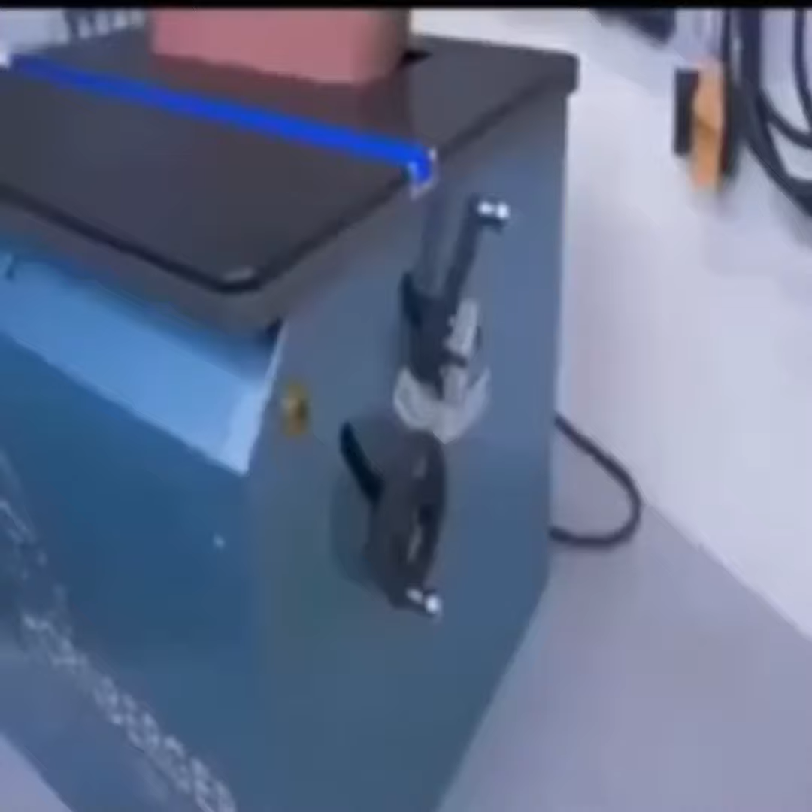Changing belts is done easily by flipping a lever, and the whole belt attachment comes off with this lever. Sweet! One feature I decided against is a tilting table. That's just inconvenient. On my machine, the belt tilts. Much more useful. It's effortless with this lever and clamped with a single knob. There's nothing on the other side, everything done from here, but it gets clamped on both sides. I'll show you later how that works.

And the big dust collection part is out of the way in the back. That's everything from the outside. You will never believe how I made the oscillation mechanism inside. But first, let me tell you the stupid reason why I built this machine. Not because of the mechanism. A few years ago, I bought this sander with way too many sanding belts now sitting in storage. And I just wanted a better use for them. Really stupid, but that's the truth.

Now, how do you approach such a project from scratch? Where to start? Well, I'll try to summarize. I wrote down a list of requirements with features I wanted the machine to have, like the tilting belt, the height preset, and so on. Then when designing at the computer, I put each feature into its own assembly. So this does the oscillation, this does the tilting, you get the idea. And wherever possible, I try to integrate multiple features into a single assembly. Sounds straightforward, but all that was the hardest part. I spent a lot of time designing. But then you can build assembly after assembly and bring them together.

So let's get back in time when this didn't exist and begin with the oscillation mechanism. I've got this precision ground shaft which needs to move up and down together with the sanding drum. A common solution is a geared motor with a crank, but to me, that's kind of boring. I wanted to couple the mechanism mechanically to the spinning shaft with a gear reduction. That should be interesting. From my machine specs, I need a gear reduction of 25:1, and I could do that with a worm gear drive.

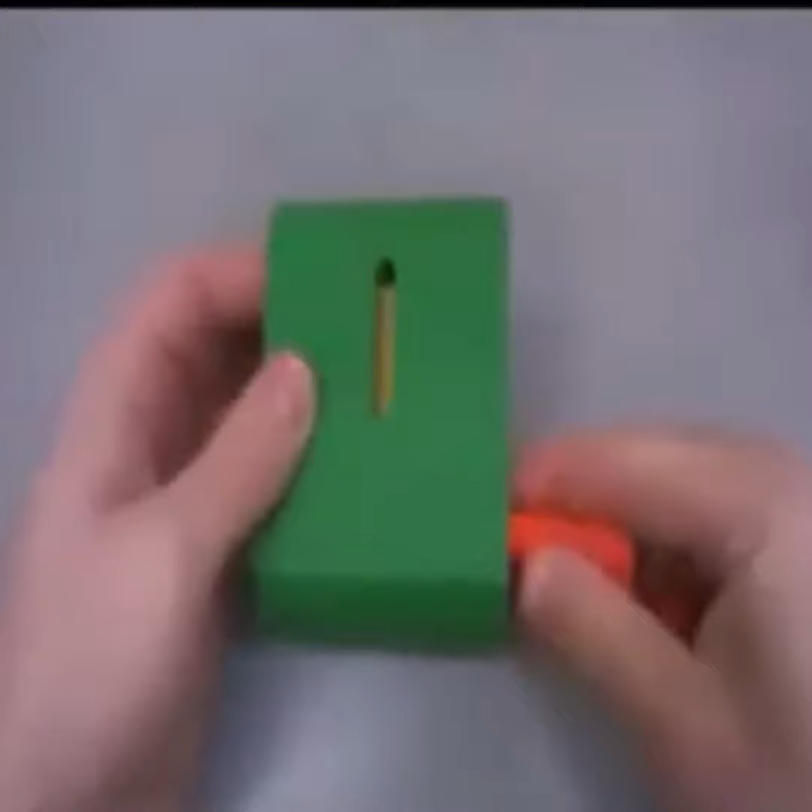Every turn, the worm advances the gear by 1 tooth. It has 25 teeth, and I've got the right gear reduction. And then I can slide this into this housing, add a crank pin here, and there's the complete oscillation concept. It's a great concept with few parts, but 3D printed like this, it can't survive long term. This has to be metal and constantly lubricated, so I would need to find just the right one off the shelf or have it custom manufactured. That's not gonna happen. So another mechanism with a high gear reduction is a cycloidal drive.

And if you ask yourself what that is, take a look at my logo. That's a cycloidal drive. Conceptually, it's simple. We have a housing with pins, the shaft with an eccentric cam, the cycloidal disc, and an output ring. The shaft goes in the housing with the cycloidal disc on top, and when I spin it, it does this kind of motion. The output ring fits on top and turns that wobbly motion again into a smooth rotation. The gear reduction is the amount of teeth of the cycloidal disc, so in this case 9:1. This concept I'm sure I can make reliably lasting with simple off-the-shelf parts and 3D prints.

And so now we've got a fast spinning shaft and a slow spinning gearbox, but no oscillation yet. On this concept, the output gear is oriented 90 degrees to the main shaft, making the crank possible. And I still need that for this one. Bevel gears, for example, could do that. But again, I don't see them lasting a long time. So what else could create oscillating motion?

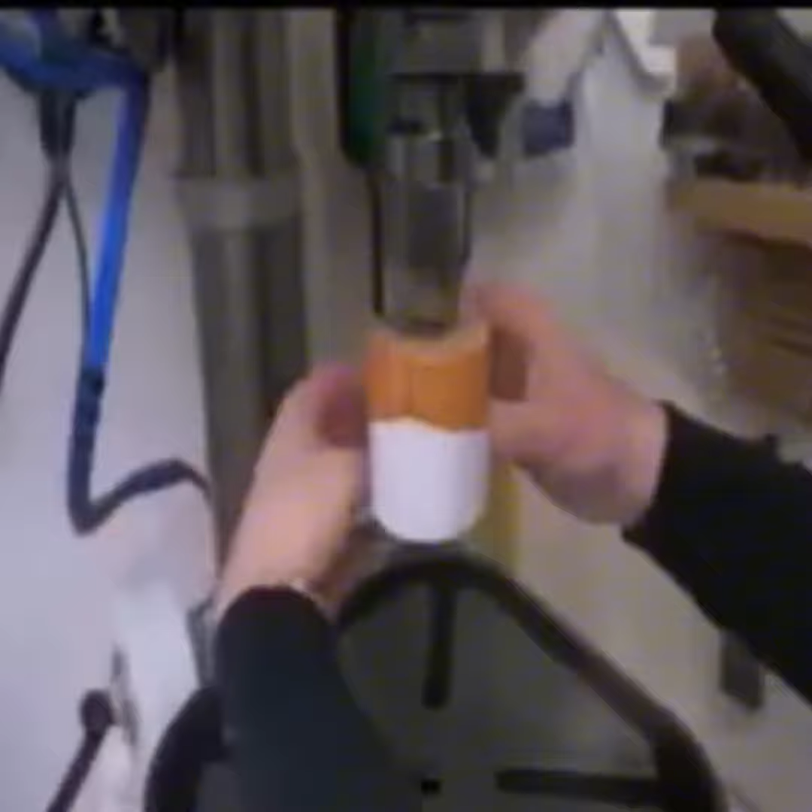Let's start simple with this ramp shape. If I move this back and forth, you can see the intersection here is moving up and down. And I could pick that up with a bearing. Now let's mirror that ramp, and the result is one up and down motion without changing directions, or rather, one full oscillation. But how is this helpful? Well, when I wrap it around a cylinder and make it spin, I now get continuous oscillation.

And what actually matters, this cylinder is the same orientation as my gearbox output and a single part. No need for bevel gears. So I think we have quite an elegant solution here and can get serious making the real version.

Getting serious means a lot of 3D CAD work. I modeled the entire assembly with every component before I ordered parts or started printing. But here we go. There are many printed parts, a few bearings, pins and screws, and machine parts, which I need right now, so I cut off pieces from some tubing. The longer bushing goes on first, with a washer and screw as an end stop that I have to play with, of course. Let's put that aside for now.

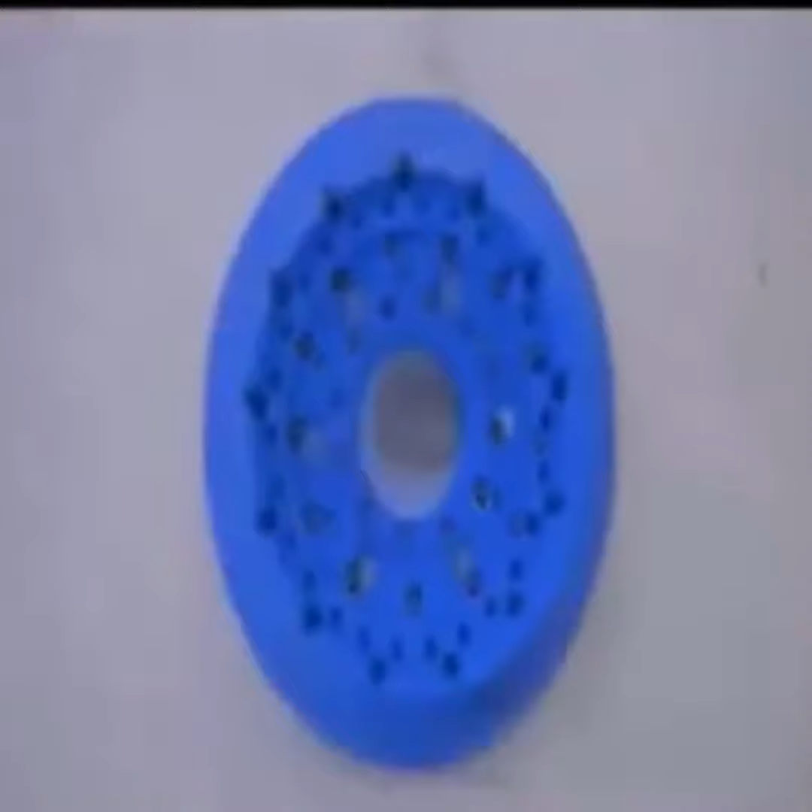Now the gearbox housing. The pins this uses are actual steel pins that fit in these holes that I still need to ream. The automatic compressed air comes in real handy here, removing the chips. The underside then gets a bunch of nuts pressed in, as well as a few on the inside. I could have also used the CNC Kitchen melt-in threaded inserts, but what they don't have is a plastic lock ring, and since I'm expecting vibrations, I wanted that.

This bearing is a light press fit in the center, and this ring goes on top, clamping it down, making this my fixed bearing. The large bearing fits around the housing, where it first slips down easily, and the last little bit is again a light press fit. And then insert all the pins.

Next, I need to make sure the cycloidal disc is sized correctly and moves freely in the housing. So when I put it in place, it should just drop down. But it doesn't, and I have to press it down. It does move, but it's pretty tough. I kind of expected this here because I designed and printed this with no air gap, and when that's a real mechanical part, it's basically guaranteed to bind in some way. I need some amount of air gap in here, but just don't know how much exactly, so let's find out.

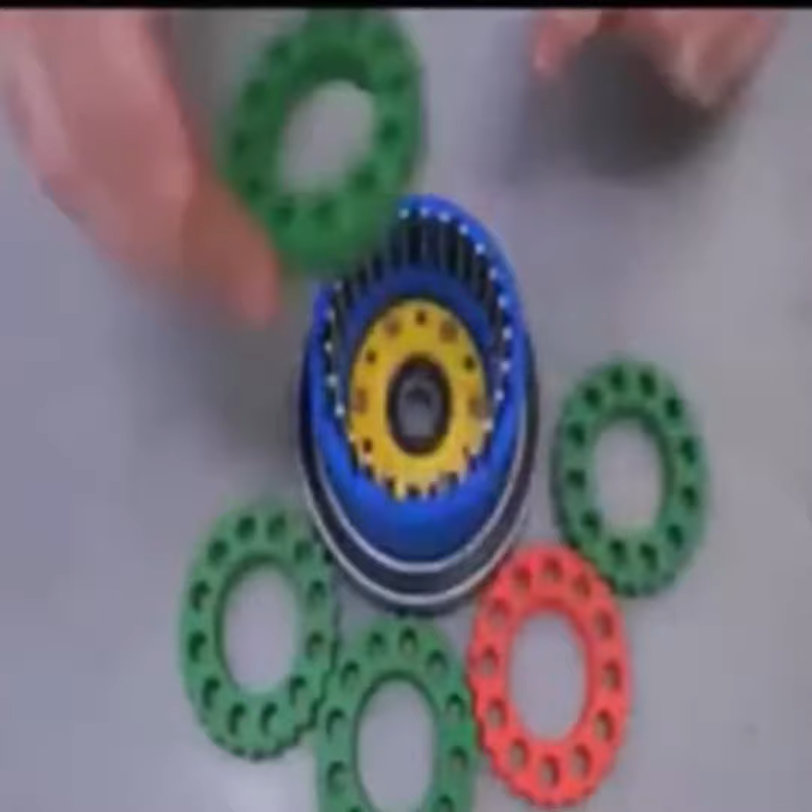I printed 5 discs with increasing play for testing, starting with 0.05. And it already drops down, but the movement is still kind of rough. 0.1. Yeah, that's a bit better, but there's still some places where it feels like it's binding. 0.15. Yeah, now it's getting better. 0.2. Yeah, that's great. And 0.3 is probably no improvement, just more play. Here you can see the play. This is 0.05 and this is 0.3. 0.2 seemed to be the sweet spot.

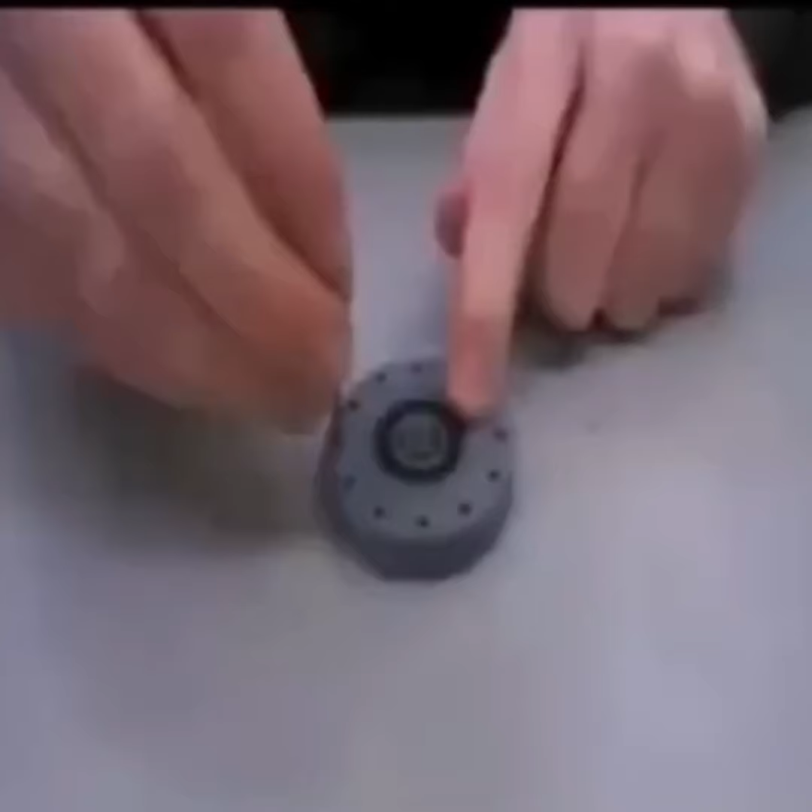Let's go with that. A bearing gets pressed in, followed by steel bushings in all the holes, which came in an interesting packaging. And then a second one. But before the discs came another ring first. It has some holes to ream, nuts to press in, a center bearing, and then the output pins, because this is part of the gearbox output and it sits below the cycloidal discs.

Now the parts can come together on the shaft. First the housing, then one of the spacers, and the output ring. Next come the eccentric bushings that create the wobbly motion. Their center hole needs to be reamed as well. Then I have a feature in them which positions them opposite to each other like so. To fasten them on the shaft, there's a pocket for a little square nut and a tiny set screw.

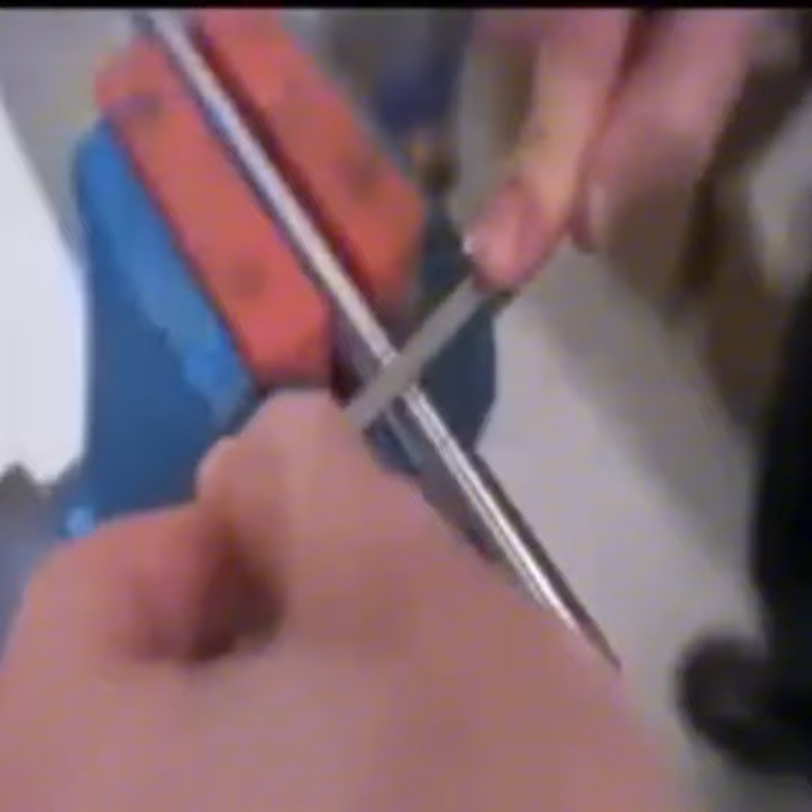And now the disc. Wait. Oh crap. I forgot to file flats on the shaft. And this assembly is not as straightforward. Yeah, at least I didn't forget to mark where to put the flats now. Since the steel is hardened, I'm using a diamond file and it bites into the material well. But there has to be a more accurate way of doing this.

I put 2 square blocks at the ends and this piece which holds the file parallel and at the right height. No need worrying about steady hands. But the real benefit is the second side, because I just need to flip the shaft and the second flat will be at a perfect 180 degrees to the first. Simple technique, but great results. The other flats are for later. Now I'm much more confident in the set screw and the cycloidal disc can go on top. I was really keen on testing, so let's do it.

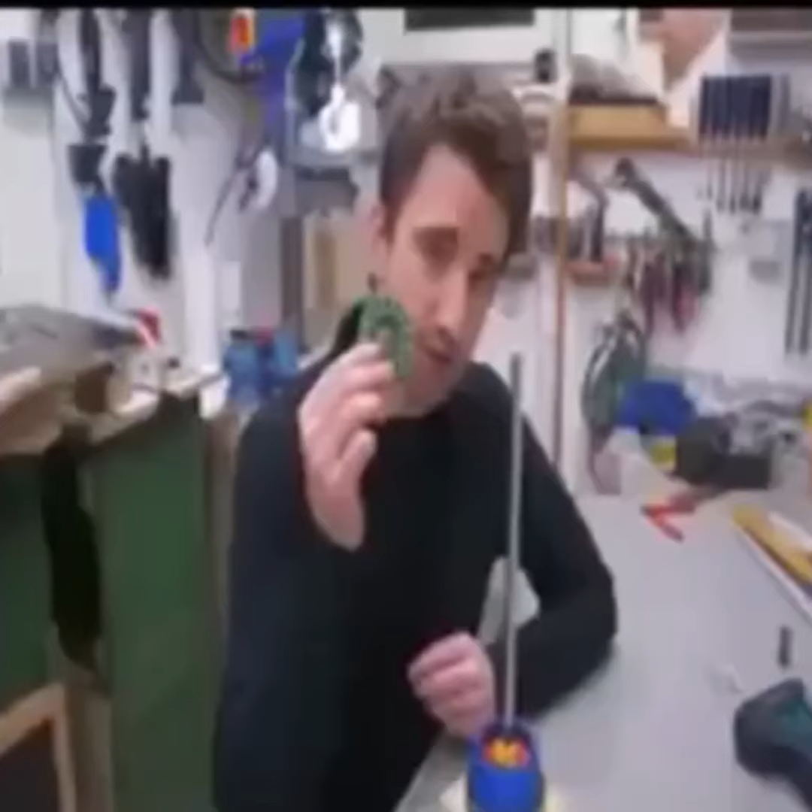This looks nice. So now the second disc. I need 2 discs because having only one wobbling around would vibrate. So having a second one opposite to the first one, the vibrations will cancel each other out. But I have to make sure the second disc is oriented correctly to the first one in the housing, otherwise these output holes won't line up with each other. Since I have 12 output holes and 25 teeth, this is not symmetrical and there's only one correct position. So I put a little notch at one of the holes to make this simple.

Right here. Looking straight down, you can now see how the holes of both discs kind of do a circular motion around where the output pins will be. So let's put them in. That looks promising. The remaining 3 holes are for screws. And after reaming the pinholes in the lid, it goes on.

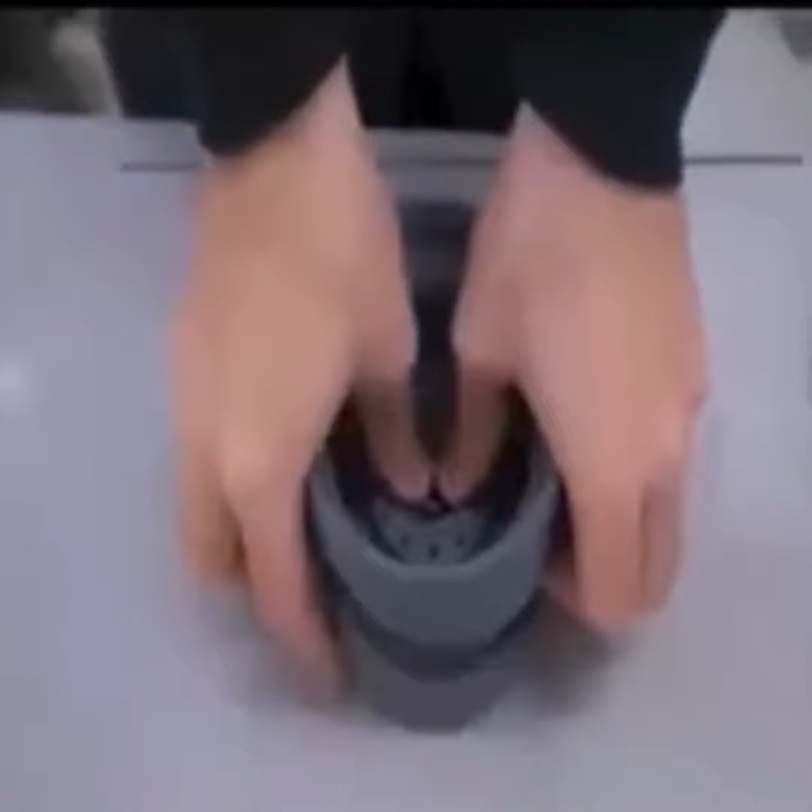On top now goes the actual gearbox output with matching holes, and on the outside there is the integrated ramp, which I made a lot smoother, and it also fits a bearing. As usual by now, reaming the holes and pressing in a bearing, then the last spacer washer, and then assembling all the parts together. The screws hold everything together, but I have to tighten them by feeling, and this is my by feeling face. Without context, this looks really stupid.

And finally, a dust cover with an improvised labyrinth seal. Oh yeah, that's the gearbox done. What a nice little compact unit, basically fully enclosed and protected from dust, which is nice. It's super smooth. I can't really feel resistance other than the 6 fresh bearings. And what you might not expect is this is back drivable, which means it works when I spin it here or here.

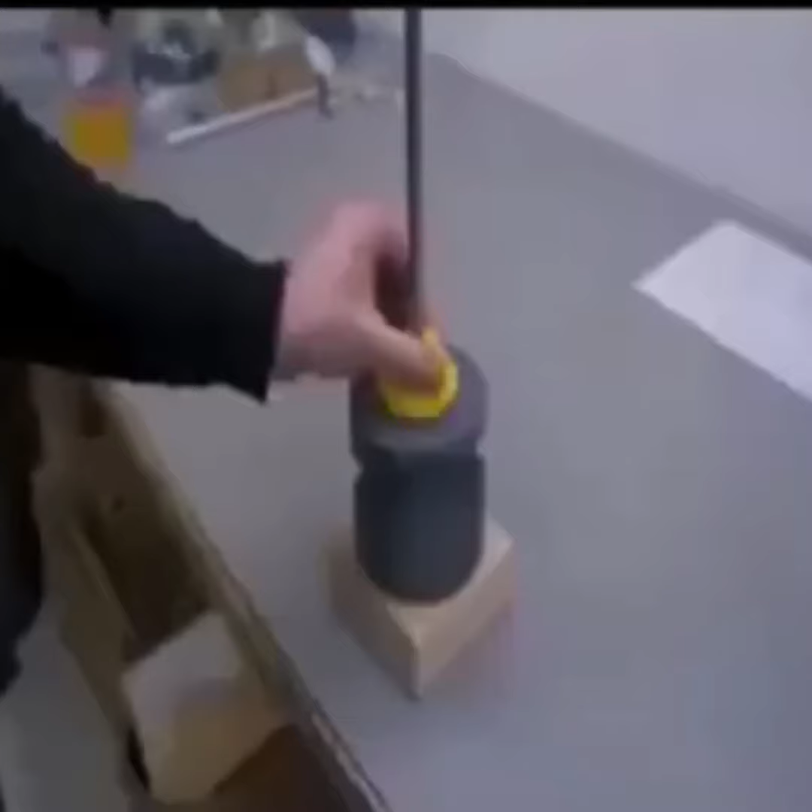That's cool. Just too bad you can't really see the inside now working. Let's fix that. There you go, I cut it open. Let's see it in action. So for this short sequence, I had to disassemble everything again, but this then at least allowed me to add grease when reassembling. But still, can this survive long term? Because it will run a lot.

Well, I'm confident because all the motion is either done by bearings, metal on metal, or at least well lubricated plastic on metal contact. And even if that's still not enough, I've got one more trick up my sleeve.

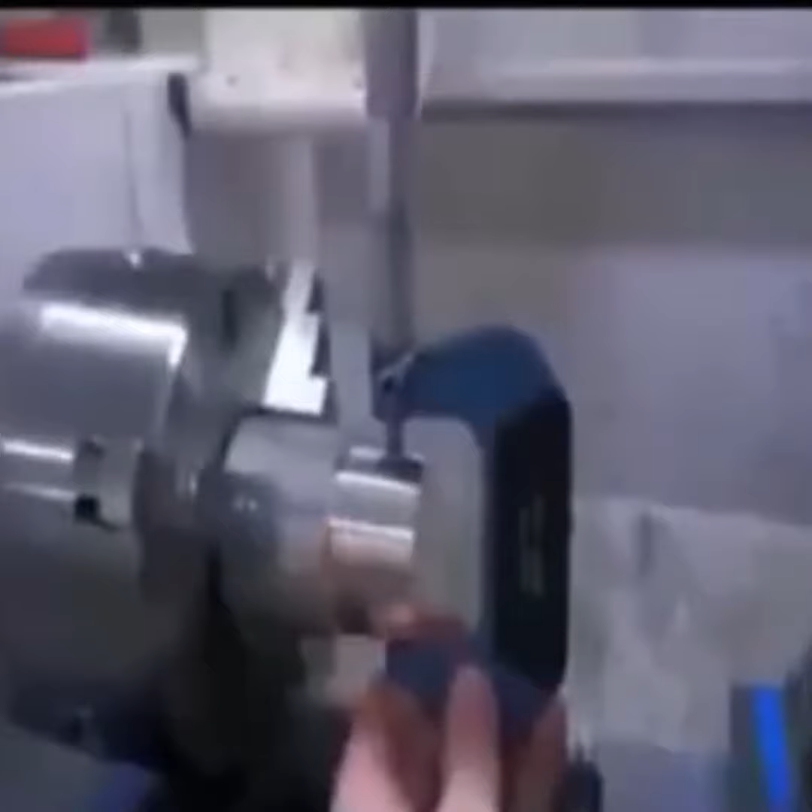But for now, let's disassemble it again, because until the final assembly, I want to stick with my parts, because I of course want to see if they work. The next part that goes on the shaft is the pulley. It's made from the pulley and the pulley support and starts out as this chunk of aluminum. This first gets a facing cut and then turned to size with a few roughing and finishing passes and a chamfer. It's a non-critical dimension, but still nice when you hit the 45mm exactly.

I used a 3D printed template for transferring the hole locations and then cut the piece off, but forgot to record. It could have looked like this. Except the diameter is too large for my tools, so the last bit is for the hacksaw. A quick jaw swap to clean up the second face, and then heading to the drill press for the threaded holes. Spot drilling, drilling, chamfering, and threading. Standard procedure.

For the set screw hole, I installed 2 screws that position the piece correctly in the vise, and with the ruler method, I made sure the part is centered. Then I carefully spot face with an end mill and do the rest. For now, this piece is done. The pulley starts as a scrap of polyethylene sheet, which I place on the CNC router to cut the screw holes and a slightly oversized circle.

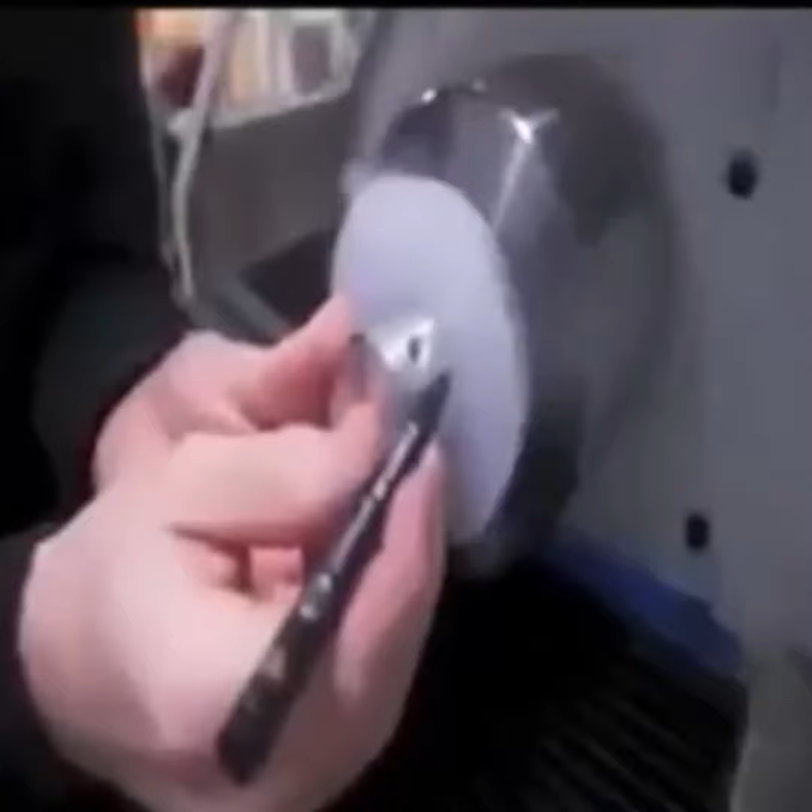Cut out, it goes in the chuck where I mark the rough size of a pocket, which I turn to a snug fit with the pulley support, followed by chamfers and removing this material, which creates very fluffy shavings. Then the pulley support goes back in the chuck where I faced it one more time and then screwed on the pulley with a dab of Loctite on the bolts.

I turned the diameter to size and sharpied it black to better see what comes next. Finding the edge with the tool, move it to the center, scratch the surface and zero the dial. Then plunging to a certain depth, creating the V-grooves for the belt and breaking the sharp edges.

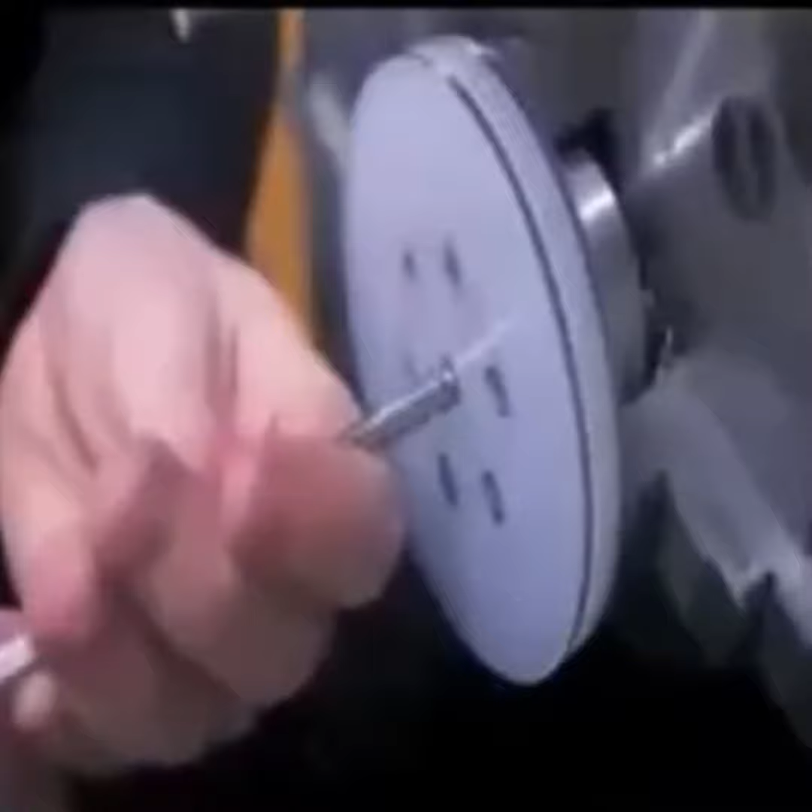The last feature is the precise center hole, which I drilled and then carefully turned to size. It took many passes, but I hit my target and the result is this. Perfect.

Alright, next comes the upper bearing block. The upper bearing sees more of the load when I'm pushing against the sanding drum, so I made the bearing housing from aluminum. Here I marked the side centers, which helped me to position the piece at the correct location on the machine bed. There, I first machined the holes that align with my hole grid, so I can use 2 bolts to hold it down, and then I let the machine go to work. The finishing pass is really satisfying, as well as the chamfer.

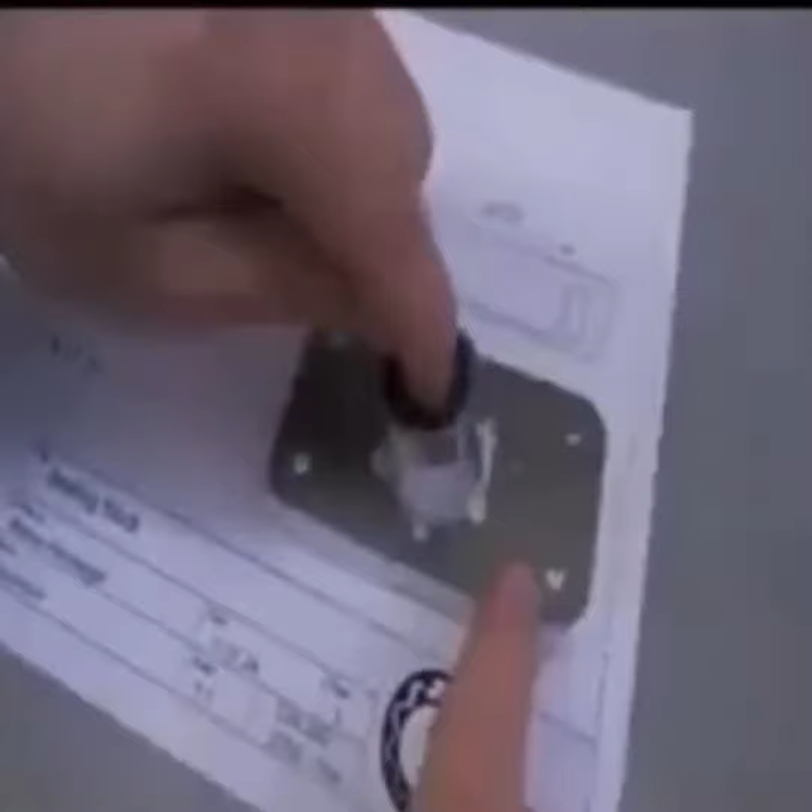Turned out really well, but right now the bearing doesn't fit, because the CNC is not accurate enough for a bearing seat. And I want to turn that, so somehow I need to hold it on the lathe. I've got some round offcuts from a laser, that should work. I marked the center and the hole spacing of the 2 hold-down holes, which I then quickly turned into threads. With a magnet on each jaw, the plate has just a little bit of stick out.

I face it by leaving some material at the center, and after about 1 mm, I turn it to a nice fit with the aluminum. That puts it in the perfect center and I can hold it again with bolts. I left myself about 1 mm of material so I can do multiple passes and get it accurate. And I think that paid off. The result is spot on. Then turning the hole to final depth.

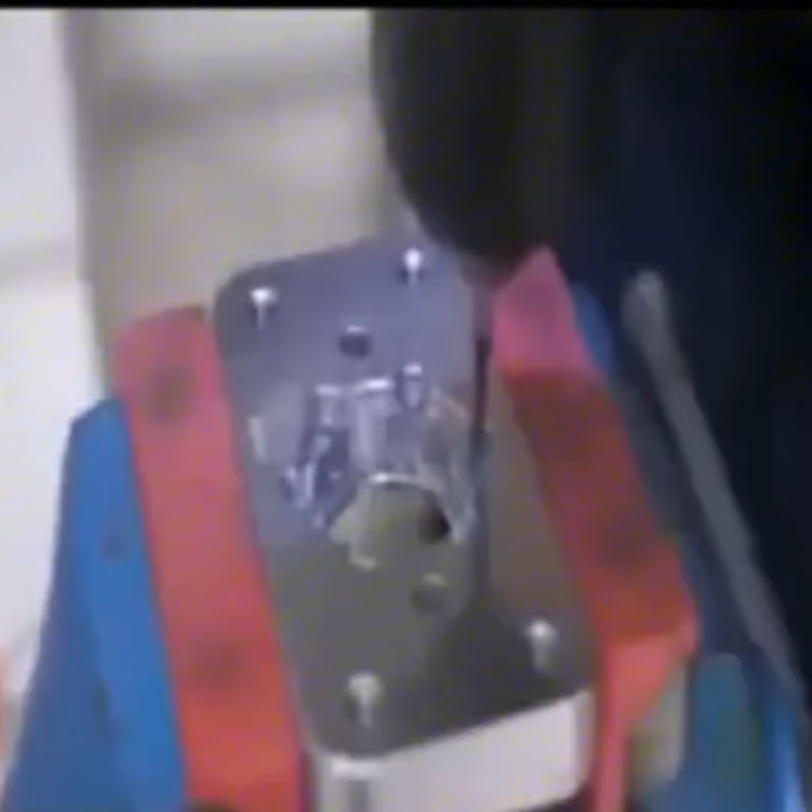At the drill press, I drilled and tapped the outer holes to M6 and the inner holes to M3. But since they are blind holes, I finished the threads with a drill and a low clutch setting. The bearing nose should be a light press fit. And it's not. Oh, fuck. Turns out the bearing is also slightly undersized, which I should have measured before.

But at least I can now try out a trick my dad told me. A layer of Sharpie. It's a few microns thick and should solve the problem. Oh yeah. That's a press fit now. Nice. And the 6 screws hold it in place.

The last part that goes on the shaft is the drive block thingy that engages with the sanding drums. It's straightforward and similar to the pulley support. I face and turn some stock to size so it again fits the template, chamfer it and cut it off. This time with recording it. Flipped around, I faced it to length and then drilled and turned the hole to the same fit as the pulley.

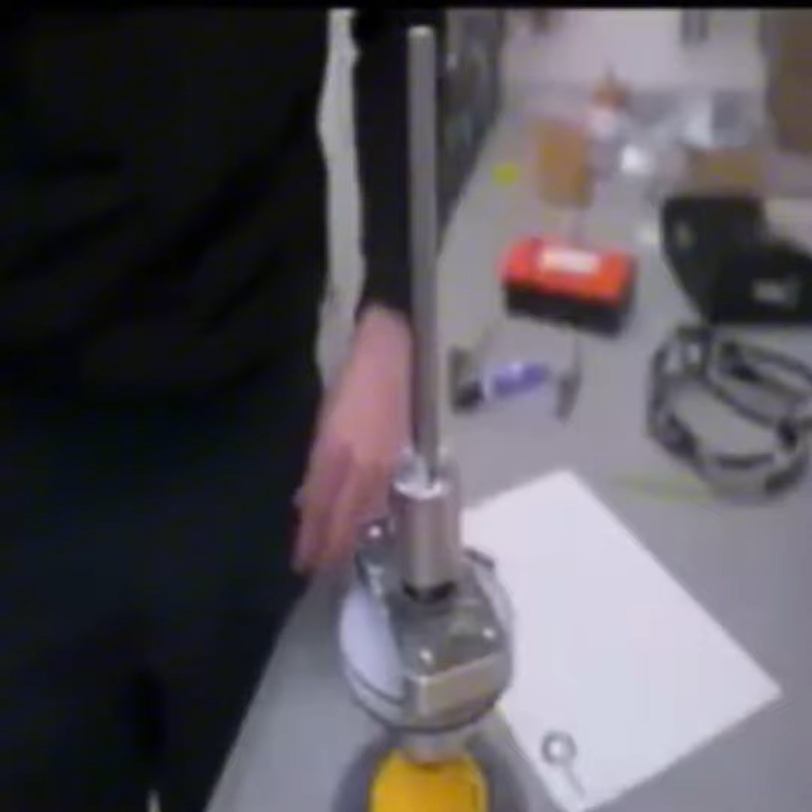Then transferring the hole positions, drill and ream them to size and depth, and hammer in some pins, which will engage with the sanding drums. They also align the part in the vise for the M6 set screw hole. Very nice. Everything is mounted, but it's far from being a finished sander.

This needs to be mounted in something, and I call that the sled. The sled basically is a wooden box where all parts have different features cut into them, and after a bunch of toolpath programming and flattening the CNC bed, I can begin. The workhorses are these single flute bits in different diameters. They allow me to take aggressive cuts and remove a lot of material. But first I have to prepare my material.

Some 18mm thick birch plywood, which I cut into roughly oversized pieces, and then cut a shallow groove all around for my hold-down clamps. This gives me access to the whole surface for machining. But mostly, the stock material isn't flat to begin with, so I shim the gaps to not bend apart with the clamps.

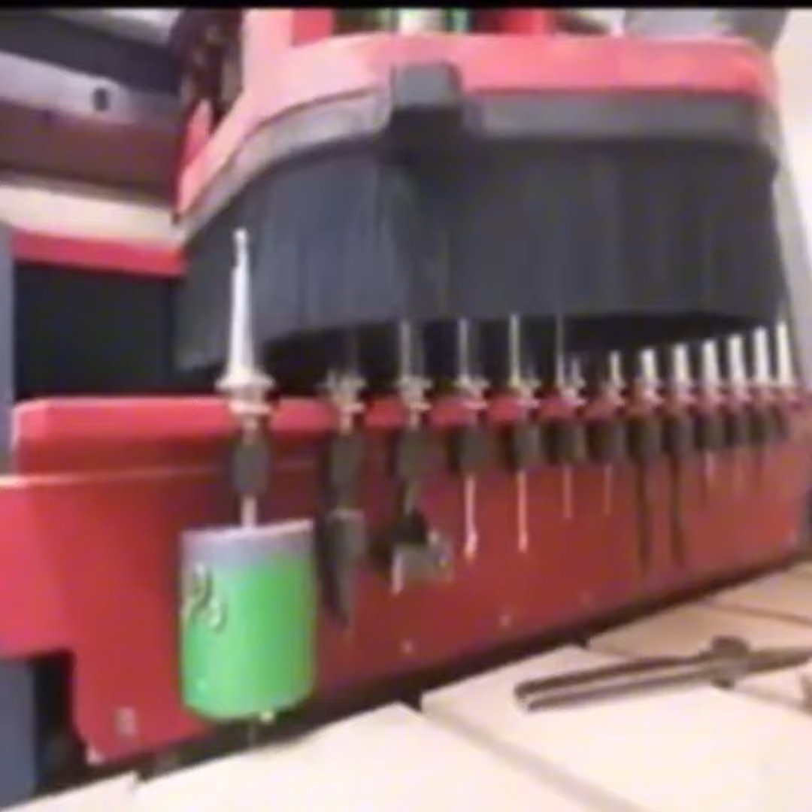I then cut the various holes and other features into the part, followed by the outer contour to about half the depth. Then I switch to the flattening bit to make the surface flat and also cut away all the burrs from previous operations. And then the program waits for me to switch to screws to finish the outer contour.

And like this, I cut all the parts. Some I also just tapped. And of course, I also had to crash into the shim, destroying this brand new bit. At least I can continue, so I removed all the bigger chunks, flush trimmed the edges, and made new grooves for the second side. I then used pins to precisely position the parts for the second side.

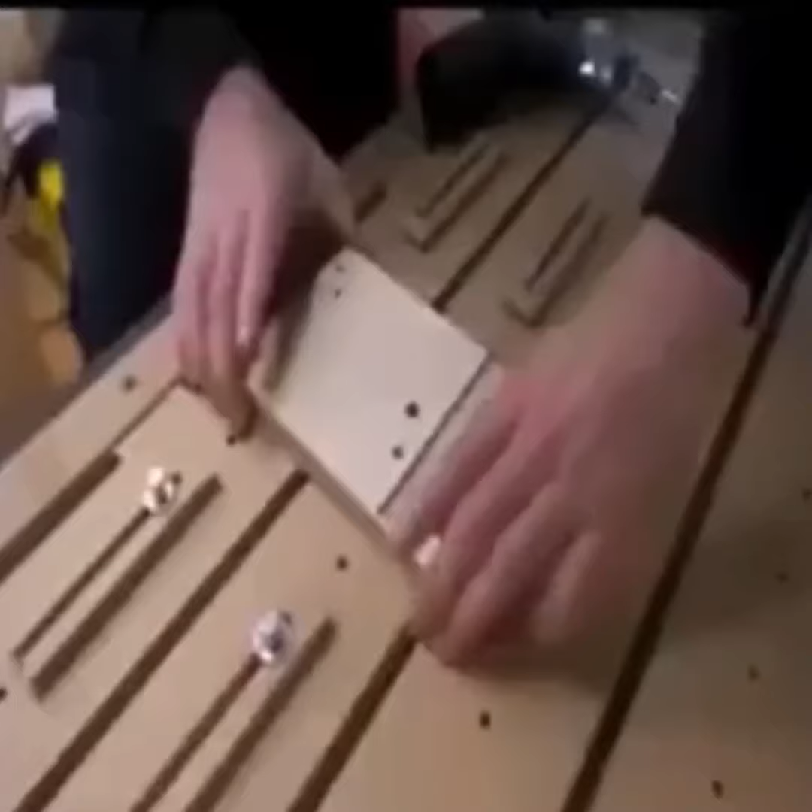That works because I have the same hole layout in Fusion 360, so the software position and the real position match, and I don't even have to probe the parts. Most of the second side operations are holes, chamfers and big chamfers, and flattening to thickness. Basically, the same for every part. And there are all of them finished.

And none of these parts are sanded, but by using the right techniques and especially order of operations, I get these clean and sharp edges everywhere on both sides. Let's check the fit. Ah, beautiful. Before assembly, I inserted a few nuts and some steel pieces that I first needed to make. However, straightforward. They will be used later.

I'll do the assembly here on the table saw, because I know this is a flat surface, starting with the back and middle piece. The bottom edge needs to be flush, and then I can transfer the holes. All these screw joints got a clearance hole using the existing holes as a guide, then a pilot hole, and then a screw. That way, the drill bit doesn't wander in the plywood edge.

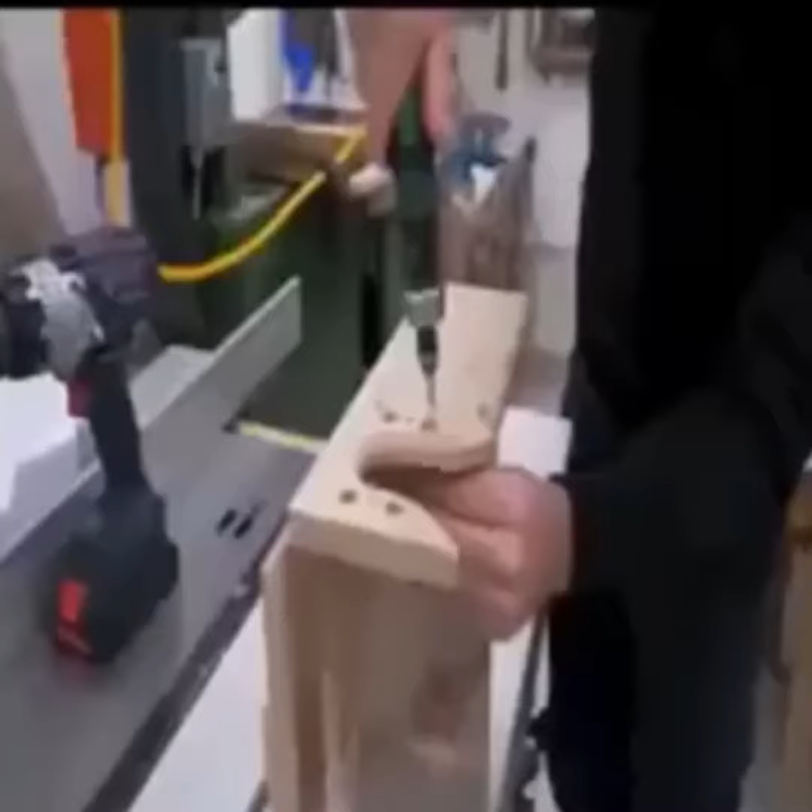Then the top plate flush with this edge, the left and right side. But they needed to be clamped in position. Lastly, this bottom piece, but it seems to be just a hair too wide. So that's the sled skeleton almost complete, and because of the way I designed this, all the pieces are kind of squaring up each other, making this a square block all around.

With it all together, I could remove a few screws again and replace them with the dowels to make it a more permanent connection. Next came two pieces for the motor mount, except they didn't require the CNC router, and then they got bolted on with the nuts I previously installed. Then I made these angled pieces that closed the gaps between the top and back plate and glued them in place.

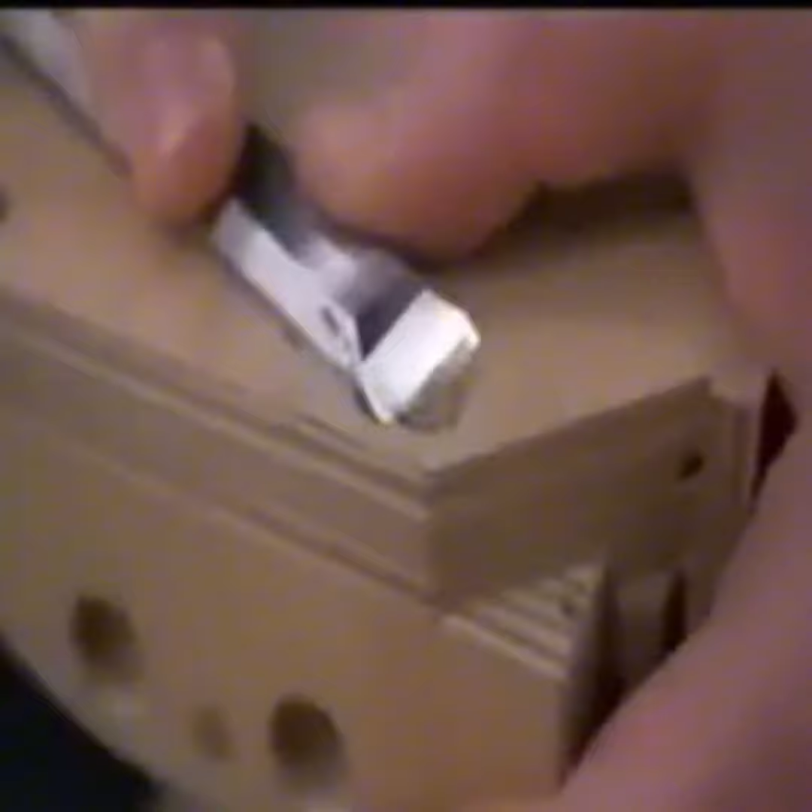With the glue dry, I flush trimmed all the dowels and then cut a large bevel, which is for clearance when tilting. That's the finished sled frame. Let's add components to it. The gearbox with belt goes in here, where the housing gets bolted to the bottom, the bearing block to the top, and the motor goes here. Yeah, what motor? I've prepared something for that.

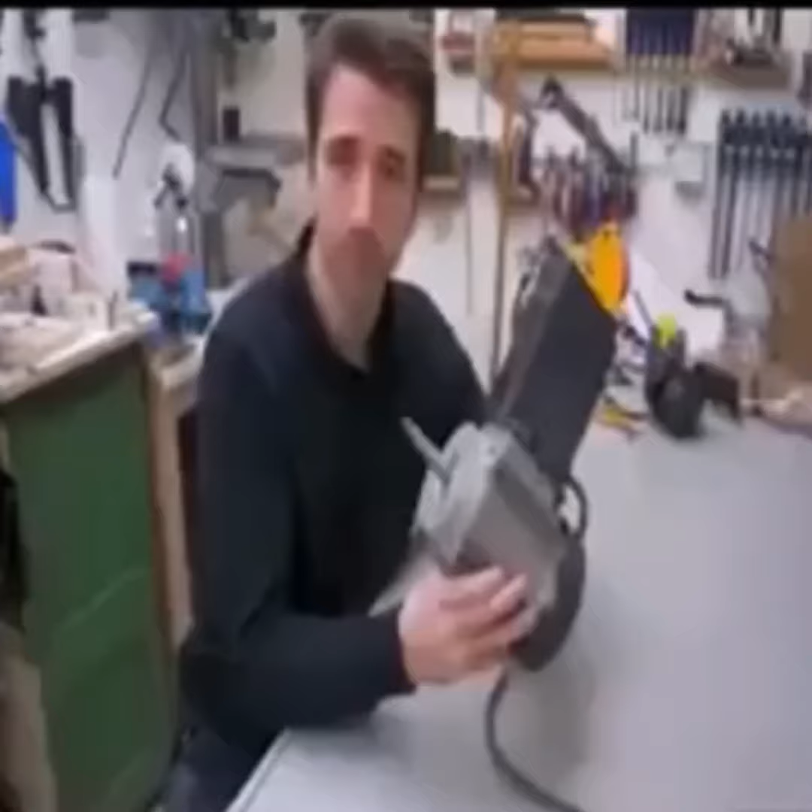I picked up this crappy little table saw for free from the garbage, where it belongs. I mean, I'm terrified of this as a table saw. But it has a nice little motor. I just need to free it from all this terribly dangerous table saw crap. And there it is, freed from the pile of scrap metal. Nice and quiet, 700 watts and 2800 RPM. That's great. The capacitor and wiring I'll mount elsewhere, so the motor really is as compact as possible.

Something strange though is this. A significant rubbing noise coming from the back. So I took off the back cover and couldn't believe it. There are two pieces on the fan that are intentionally rubbing on the housing. Why? Was this supposed to be a motor brake for the table saw? I don't know. Let me know what you think in the comments, but this will go. Even spring-loaded.

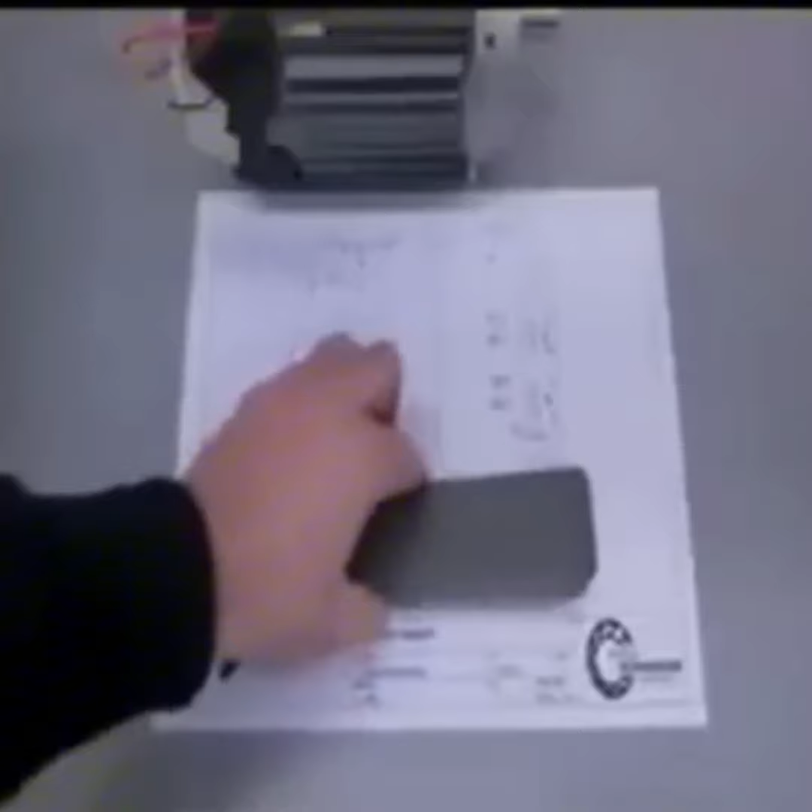Now right here on the shaft needs to be a flat spot for the pulley set screw. I could hold the shaft in place with vice grips and use a similar file contraption as before, only this time the shaft isn't hardened, so I could use a normal file. The rest of the shaft is too long and I also don't need it, so off it comes. I then let it spin to clean the end and chamfer it before I started working on the motor mounting brackets. I cut them from some steel flat stock. Another job for the big ass file, getting the length right until they fit in the sled.

Then I transferred hole positions, punched them and drilled them. For the slots, I drilled multiple holes that slightly overlap each other, so I could fit a jigsaw blade to remove material, so I could fit a Dremel to remove material, so I could fit a file to finish the slots. Not my best work, but the slots work and that's what counts.

Then I transferred hole positions again, drilled pilot holes and added screws. I couldn't reach the top screws, not even with a driver bit and pliers, so I opened up these holes and used hex head screws. Now that's a solid mount to bolt the motor to.

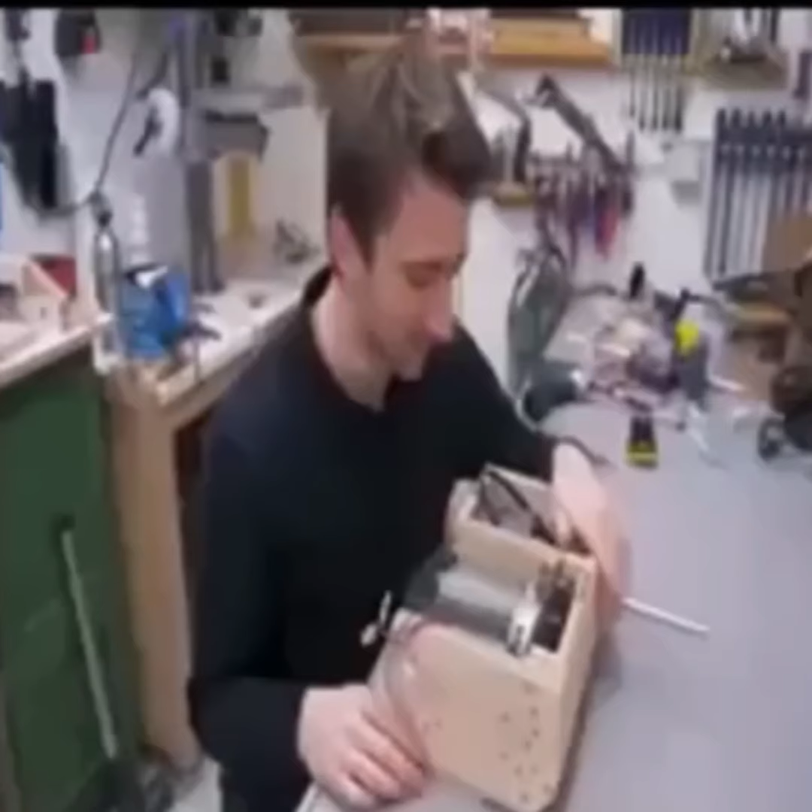Well, I've got a problem. I cannot get these back screws installed. There's just so little space, and I knew this would be difficult. I can get them in place, but then just can't get the thread started and the screw jumps around. And the pulley isn't even installed yet. I don't want to drill access holes in the top because I wanted that closed off.

Yeah, but I have an idea that might work. With a threaded piece, I can hold the bolts in the lathe chuck and work on the threads. I had to shorten them a bit and then remove the threads of the first couple millimeters. So now the screw can fit in the hole and stays in place, making it much simpler getting the thread started. Then I also realized I could remove the front support for more access. Nice. And the threads are in.

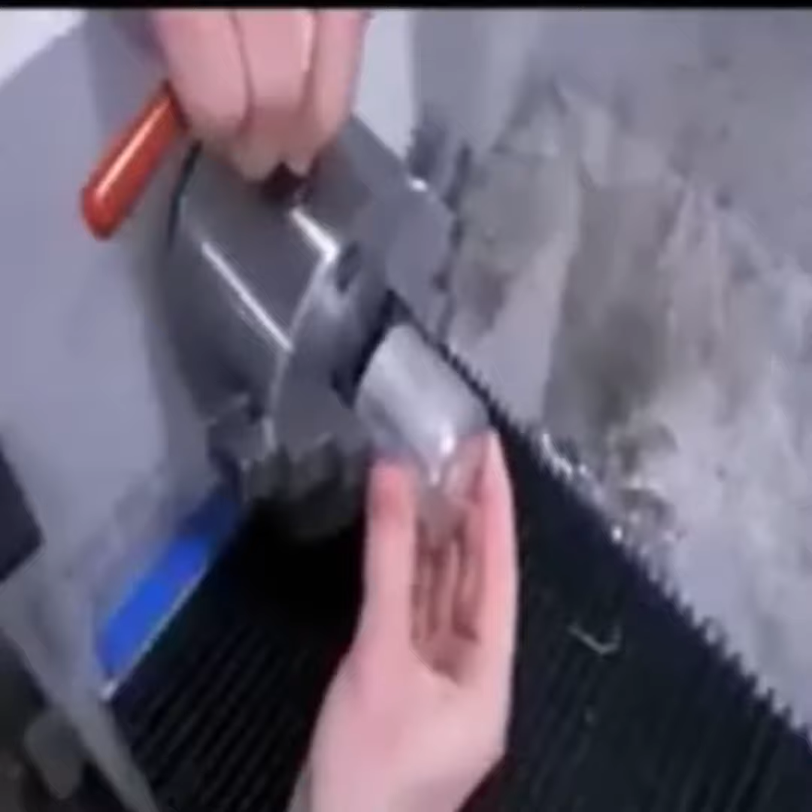Alright, now I know how I can mount the motor and can continue with making the pulley. It's relatively simple and starts from this piece of aluminum from before. First facing, turning the major outer diameter and the step to size. Then I again mark the surface to easier locate the edge and the starting depth, and then turned the 3 slots just like before. Here I also broke the sharp edges with a file.

And lastly comes the hole. I first removed most of the material with a drill bit, then measured the actual motor shaft and turned the matching bore. Checking with the motor, and that's good. Flipped around, I could part off the rest, or at least that was the plan. Luckily, only cosmetic damage and I could continue. Everything left is facing to length, turning the second step, deburring the hole, and making the threaded hole for the set screw.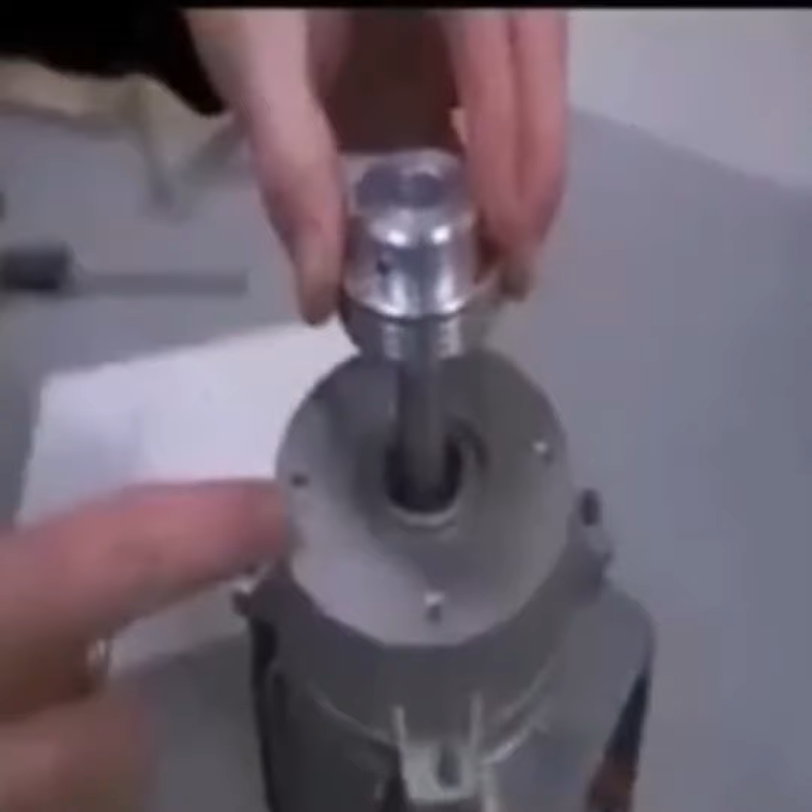For the wiring, I 3D printed this custom lid. It fits one of these cable clamps. The capacitor has its place here, with the wiring going internal through this hole. And when it's assembled, the hole will line up with this one that I need to open up. Not only that, but also cutting through the top. Then I finished up the wiring, gave it a test spin, and closed the lid. That turned out nice.

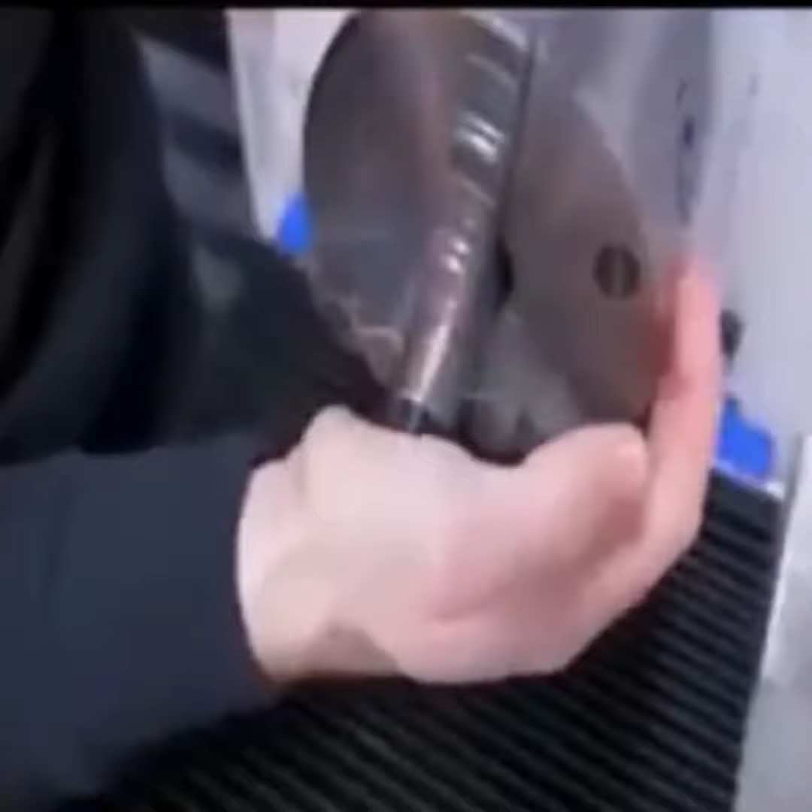Another addition before testing the gearbox with the motor are 2 bearings on top of the gearbox output. They are the axial support and will take load away from the other gearbox bearings. But having just plain bearings on top didn't work so well and was wearing the surface quickly, so I printed these cover parts from TPU, turned and chamfered them and pressed the bearings into them, like wheels. That's better.

And back to the motor. I spent some time installing it back in the sled, got the belt on the pulleys and tensioned it. It's also important for the pulleys to be aligned to each other, which I could adjust and check with a straight edge. And now it's ready for the first power test. It works. Woohoo! What a strangely soothing and satisfying motion.

Very nice so far. Now I will remove everything again, because moving forward it's easier when there are less parts and weight. For the sliding hardware I'll be using a linear rail with 2 blocks, because this set, with just about $40, is pretty unbeatable. The blocks have two precise surfaces, one where it gets mounted and one here that runs parallel to the rail. And to get them aligned on my sled, I've machined two holes for pins where I can slide them against. Mounting them to wood isn't really ideal, but at least I've all the surfaces machined. And here I thought about access holes.

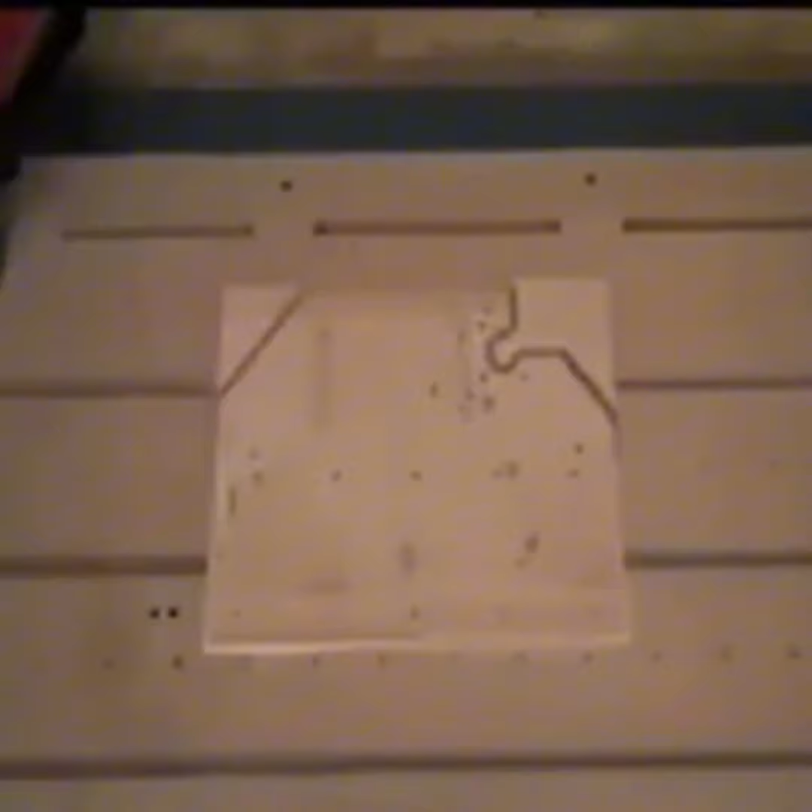That's the sled finished. Next, it again needs to be mounted in something which I call the carriage. It basically is another wooden box around the sled where it can slide up and down in. It also holds the mechanism for raising and lowering the sled, and later the components for the tilt feature. Just like before, I prepared all parts for the CNC router and let it do some magic, like this. Or this. How about this? And that. Or this. And then all the other sides, as well as some manual work.

These are all the parts, and the assembly is quite similar to the sled. All the hexagonal holes receive some nuts. Two holes get threaded for a screw that will later be an end stop. The smaller parts are bushing and bearing housings, and then there are again alignment pins for the linear rails. The assembly starts with these two alignment angles in the side piece. And like before, everything gets a pilot hole and a screw. They are the alignment and square reference for the front.

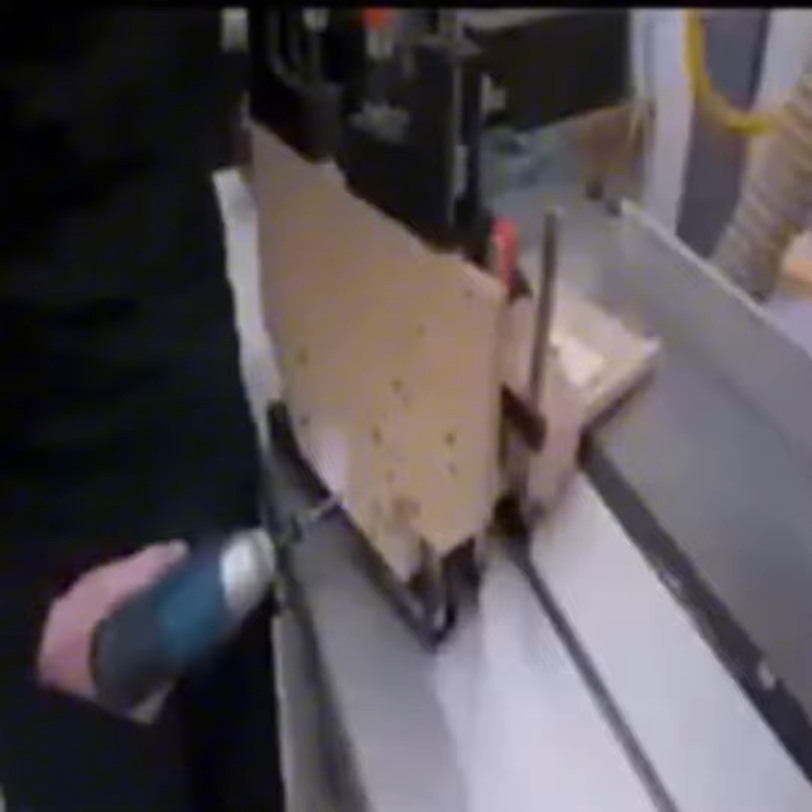And now this is nice and square. Next is the back and the other side on top, so I can clamp at the bottom. Then the bottom, which also squares up the back. And finally the second side, which now has lots of alignment surfaces.

Alright, that's the carriage assembled, and I now need to check if the sled with rails attached fits inside here. And it fits. Nice. Just a little bit of friction and it's not getting tighter. Oh yeah. Seeing this work is so satisfying and quite a relief, because there's already a lot of time invested here. I slid the rails against the pins and screwed them down.

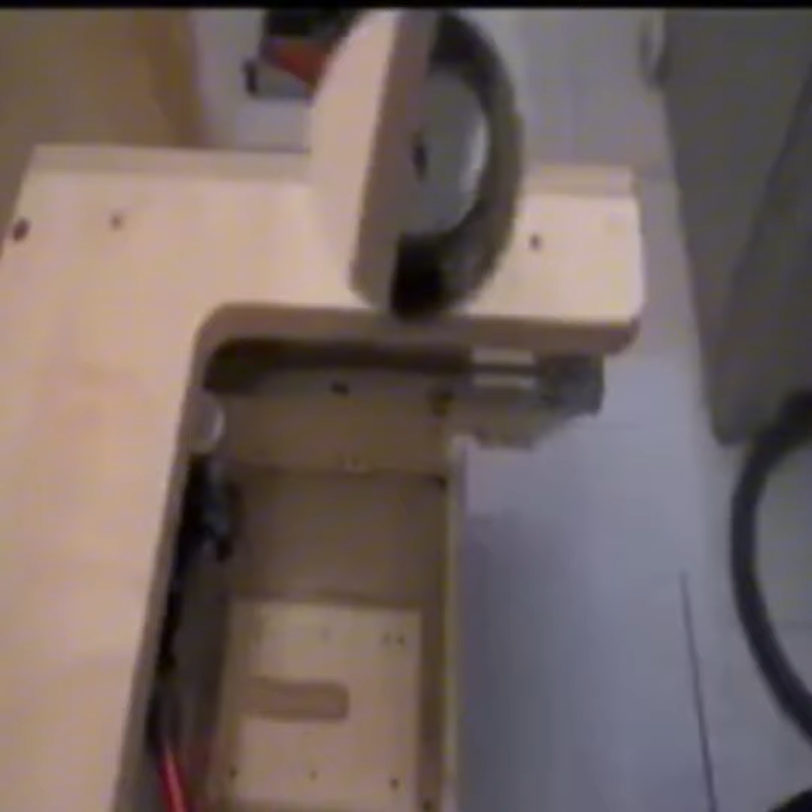The two rails should now be parallel to each other, but you can also check that with a dial indicator mounted on a block. About 1/10 of a millimeter variation. And against the face, it's a little over 2/10. If I'd be building a CNC router for steel, that would be terrible, but in this application, where also the frame is wood and not that stiff, that's perfectly fine. And knowing that, I could replace some screws again with dowels, holding it together for good.

While that's drying, I can start working on the assembly that will go here, that interacts with the slot in the gearbox, and also allows the raising and lowering of the whole sled. And when you look at the available space left, this had to be very compact. Conceptually, there needs to be this bearing mounted rigid, so the gearbox can push the sled up and down from it. And additionally, I need to be able to move the bearing up and down. The very first concept I had in mind, I guess could have worked, but I'm glad I scrapped it for this one. There are some steel parts that I took care of right away.

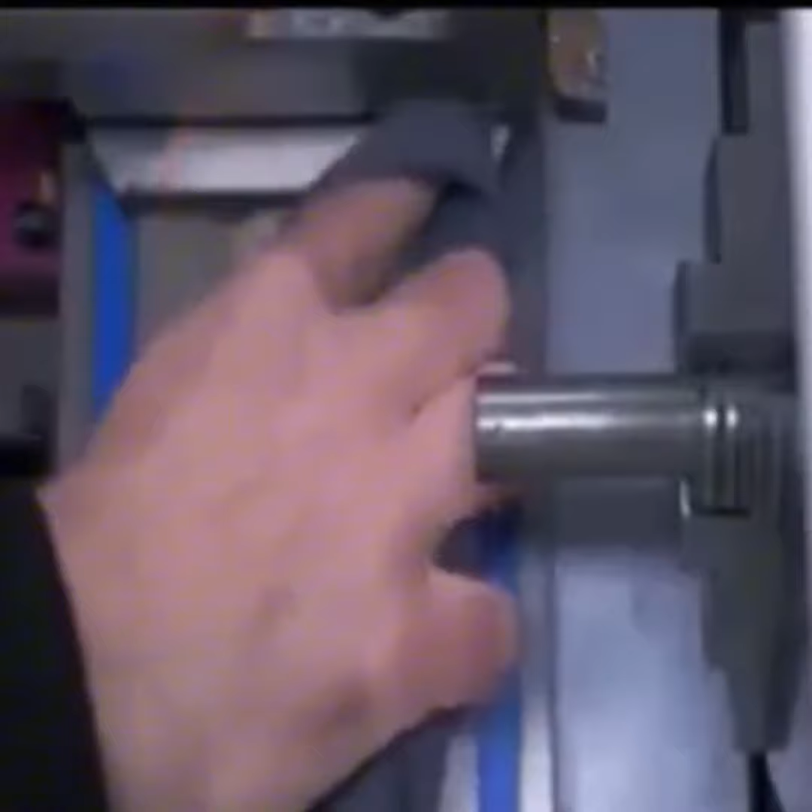First a pin, so lathe work. Relatively simple part, first facing the end and making the M5 threaded hole with just a little bit of lubrication. Then turning the outside, the overall biggest diameter, then the 12mm part, a bit less for the M12 threads, and then the 8mm section for the bearing. Then adding a lead and chamfer for my tailstock threading die holder I built last year. What a great little tool. And after that I could cut it off.

But something seems wrong. This doesn't match the drawing. I forgot to add the thickness of the cutoff tool. Starting over is so much fun. But now I could chuck it the other way to face it to final length and cut the M8 threads. In the vise I filed the wrench flat, and this part is complete.

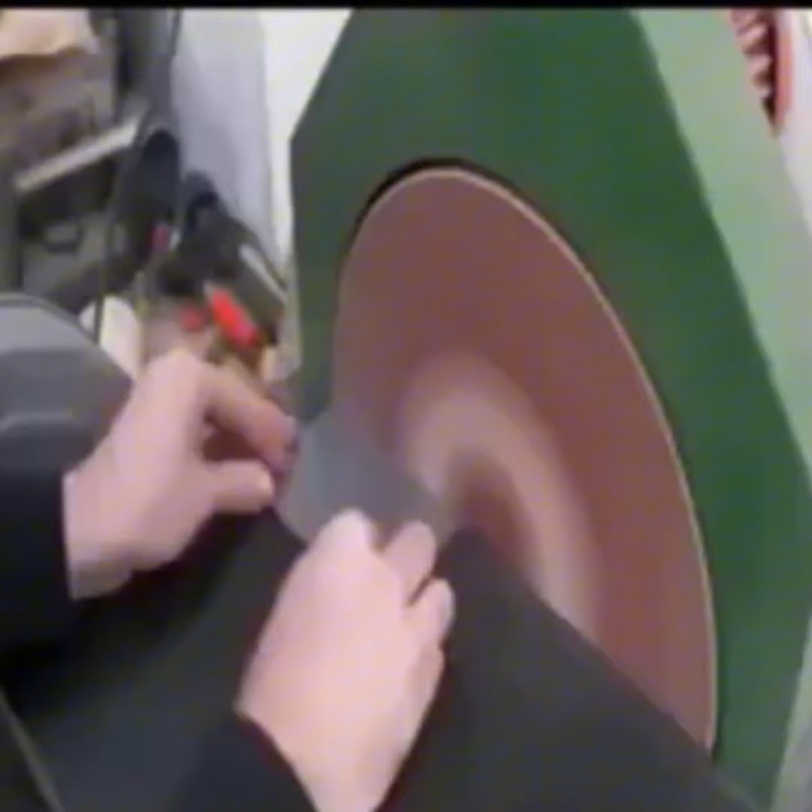Next is a plate for which I could use the offcut from before. I just needed to bring it to length, mark the hole location and drill it. Lastly, another plate that I cut and sanded to size so it fits the cutout in the carriage. For the slot I used a step drill, removed the middle with the jigsaw, and filed the rest. Perfect.

Okay, I need one more part from the CNC router to demonstrate the concept, and like the gearbox output, it also has a ramp. This material is not wood, it's called HPL, and it's kind of a mixture of wood fibers and resin compressed together and with a pretty hard and durable surface. It's also weather resistant and dimensionally stable, but I can easily machine it with woodworking tools, thus making it a very suitable machine part.

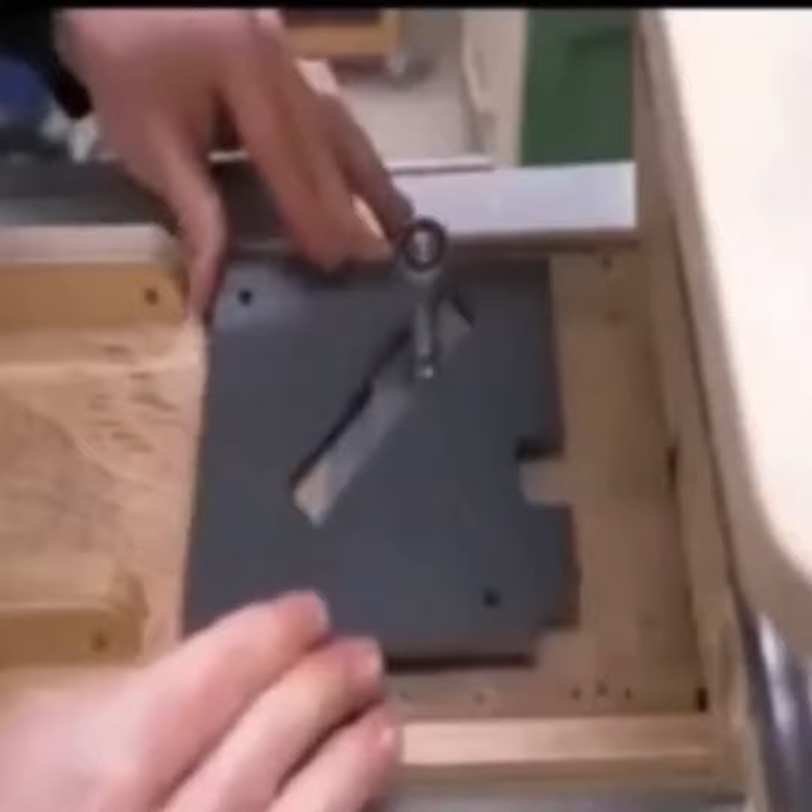This gets bolted together, pin in the slots, and the ramp on top, and the bearing. And now as I slide this left to right, the pin slides up and down. All this now just needs proper guides, so it's solid and works smoothly. My material choice are sheets of polyethylene, which are dimensionally stable with low friction.

I could use the same hold-down techniques from before, and also use my woodworking tools, just a bit less aggressive. Great camera placement. In general, quite an easy material to work with, but the chips can get pretty annoying sometimes. Now with this cut and still clamped, I can check if the depth of this step is the same as the thickness of the slider. And I can already feel and tell that's not the case. 6.34 for the thickness and 5.98 for the step. Let's fix that.

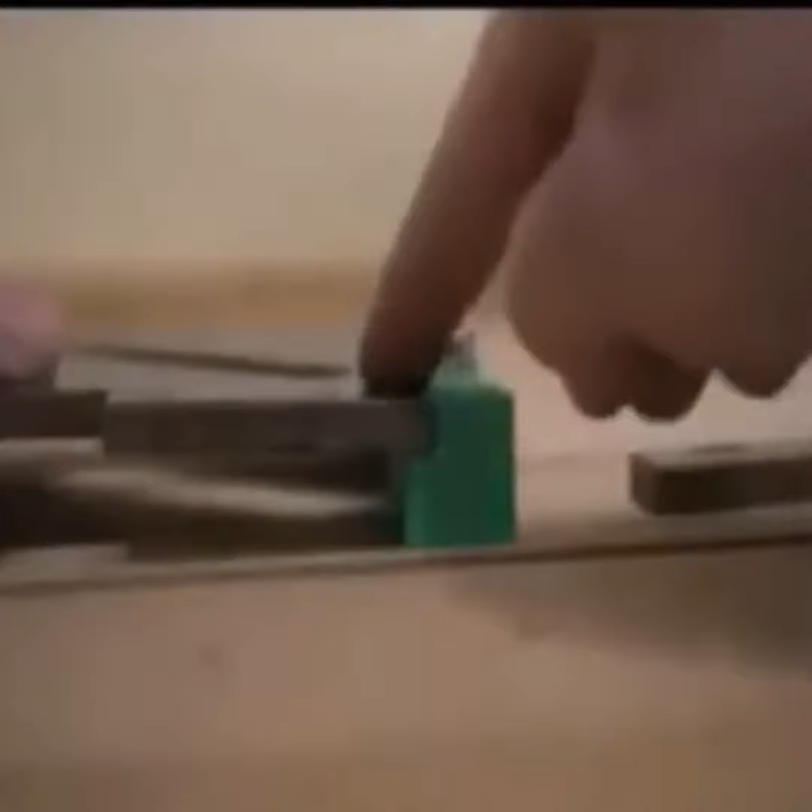Ah, that looks good now. And with the lid on top, it can still slide freely with little to no play. Some more features for the other side, and onto the smaller guides, which are basically the same, but simpler and with additional manual work. And there I've got 6 nice parts and one glorious fail.

One of the guides for the metal plate was supposed to be aligned square with pins, but something obviously went wrong there, and this won't be helpful. However, the hole in the backing plate is accurate, which I can use as a pivot and then align it with a square.

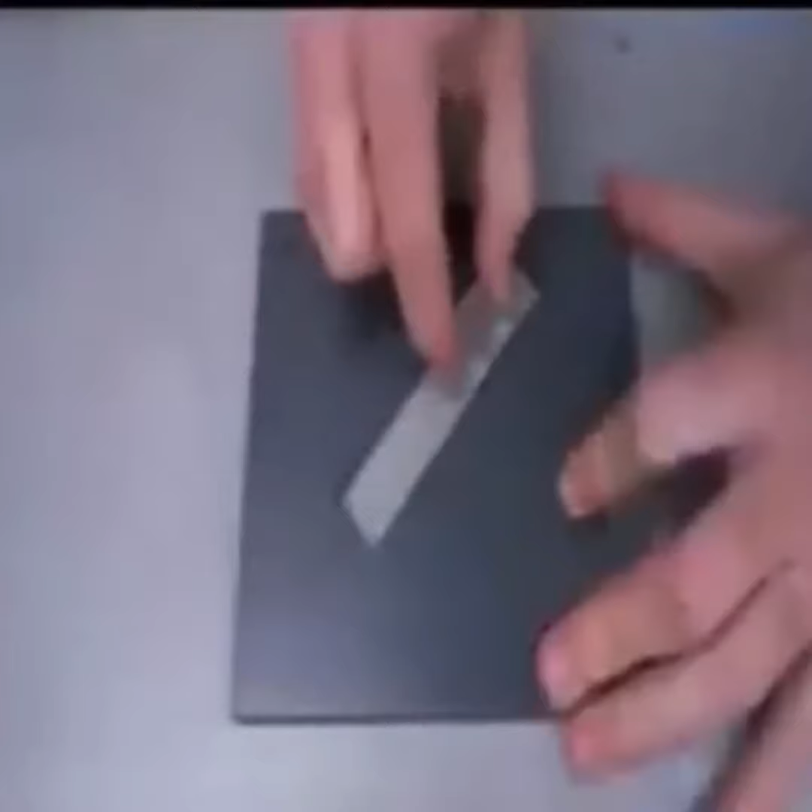Did I just say one fail? I meant 2. That's better. Nice and smooth and very little play. The pin got an acrylic glide bushing, which I machined to a perfect slip fit and reamed the hole. The acrylic is hard, has low friction and had just the right thickness. Then a lock nut to secure, but not tighten it.

The other guides received some nuts before the installation. What? Ah, great. The holes don't line up. And a drill doesn't fit, so guess who spent some quality time drilling holes by hand? Me having to watch this again is just as painful.

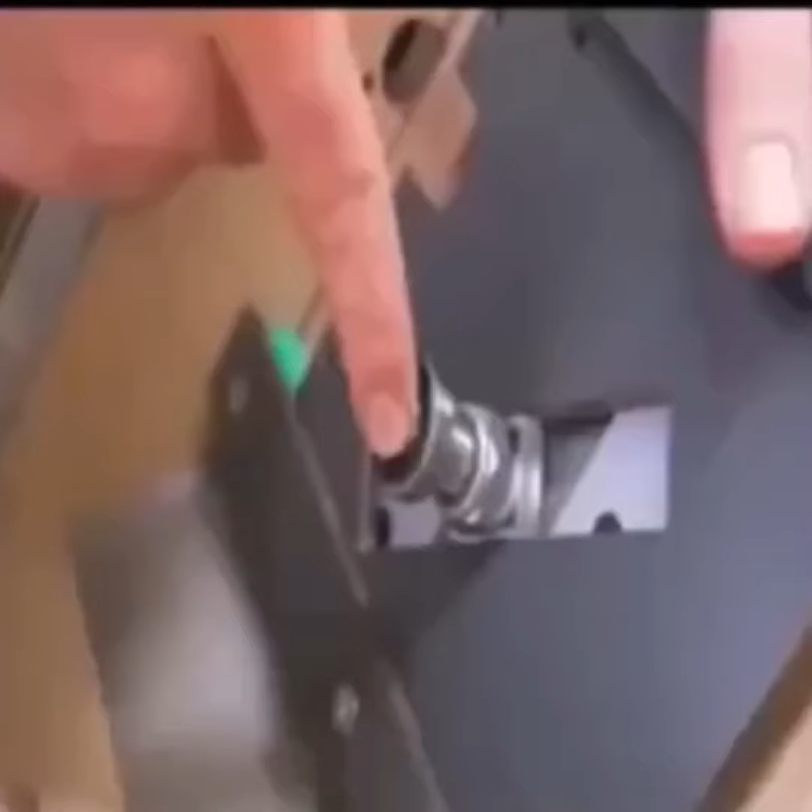Okay, now the next problem. The slider doesn't fit. At least that's an easy fix with some precise table saw cuts. Perfect. Then just adding the lids and the bearing. Wow, that took quite a while, but now it works smoothly. The bearing feels solid with little play. That's good. Next is the hand crank coming out the sides to control the height, which involves all these parts.

This 3D print receives some nuts and gets screwed to the slider. This little trapezoidal nut needs to be flat on one side and gets mounted to the slider as well. The little bearing flange from before gets screwed to the outside with the threaded rod right through. The nut is just a little snug and still moves, which allows me to now align it with the spindle axis and then lock it in that position.

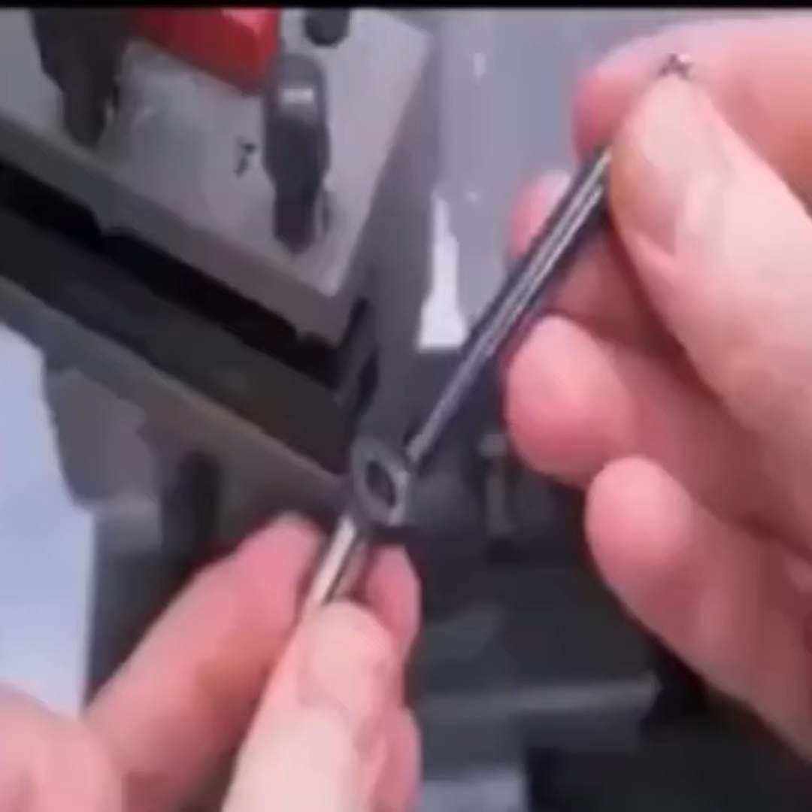Next I turned a tip to one end, which I could use to transfer the right hole location into the guide rail. It's hard to see on camera, but there needs to be a hole for a tiny brass bushing. So turning some brass to a light press fit and then the hole, which I started with a 6mm end mill and then used another end mill in a bushing, in a bushing, in a mount, in a tool holder as a tiny boring bar, and that worked pretty well. The remaining wall thickness here is just 0.25mm, but it worked.

With everything back together, the threaded rod should now just fit in the bushing. And it does. Nice. This now allows me to pull the slider towards me, and to push it, I have this adjustment ring against the bearing, with access to the screw here. Very nice. And lastly, the hand crank. It's a 3D print and I'll mount it with one of these clamping rings that I drilled 2 threaded holes into.

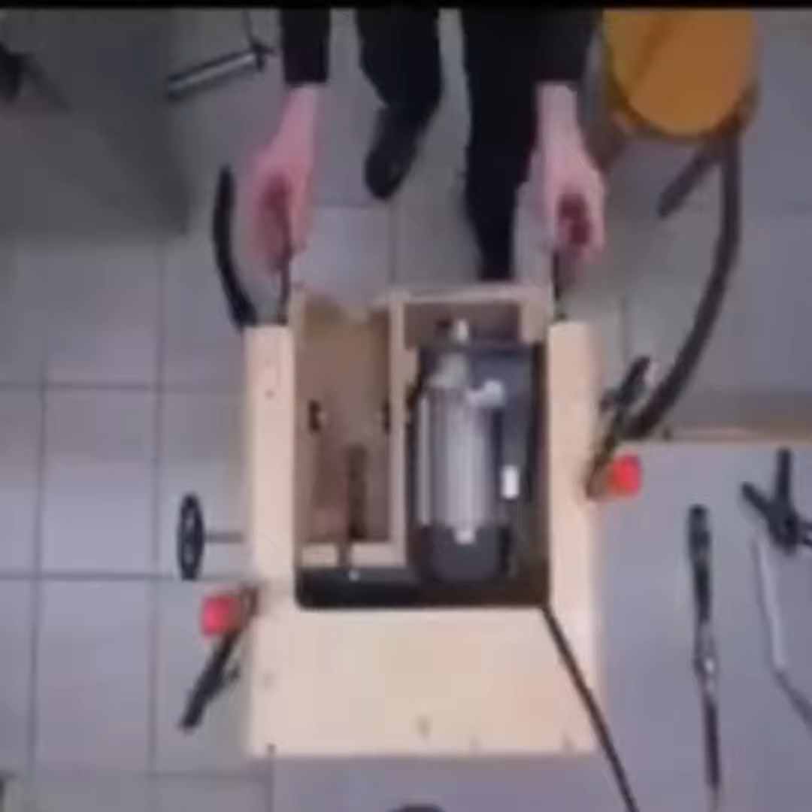The shaft is still too long, but I'll shorten this later, because now I want to see how and if this works together with the sled. That's an extremely important test, since the whole sled weighs 10 kilograms. So as an afterthought, and just in case, I'm installing some gas springs. Alright, and there I should get oscillation. Oh yeah, it works!

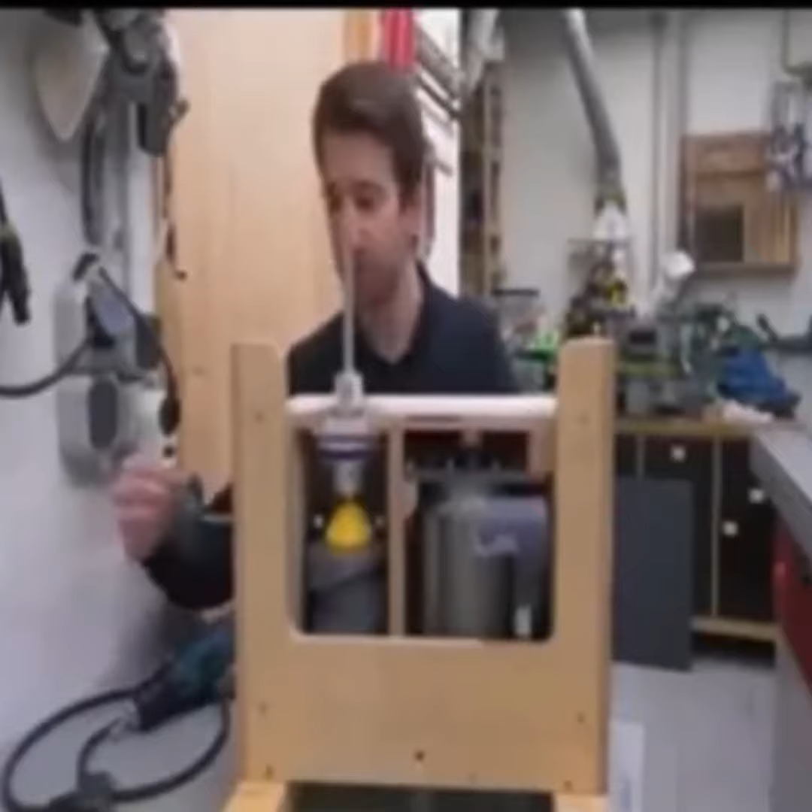Okay, and now with gravity on, lifting 10 kilos. It's pretty smooth. Nice. Isn't this amazing? That was without the gas shocks, all the weight just on the gearbox. So let's hook them in and try again. Well, I can't tell much of a difference here, but the hand crank. Oh, that's now so easy to crank up. That's with the gas shocks. And that doesn't sound nice.

And now, of course, with the motor. Oh yeah. Nice. Now that's a huge milestone, but next this, once again, needs to be mounted in something. And I call that the trunnion assembly. Yet another wooden box, and it's what allows the tilting motion, and is also the machine base that holds everything together and will later also carry the table and dust collection.

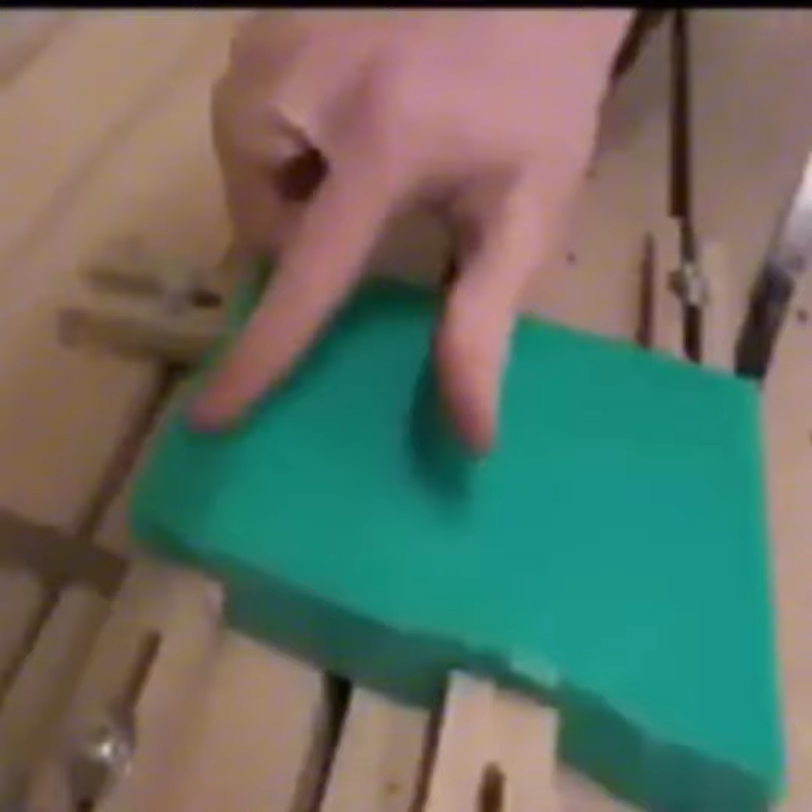The most interesting parts to start with are of course the trunnions, which I again make from polyethylene sheets, but thicker. It wasn't flat to begin with, so I shimmed and flattened it before the actual machining. But then it's not much different from other parts so far. So cutting holes, chamfers, flatten it to thickness, and mount it with screws for the contour.

Once done, I checked the trunnion width, and since it came out right, I could already cut away the remaining stuff, position it with pins to remount it, and cut the second side to finish it up. But eventually, the camera was tired.

A clever detail is that the holes I used for positioning on the CNC bed are now also used for positioning the part on the carriage. Everything has a purpose. Then just making the second one. And this one has a little bit of a flexible section. There's this tapered hole where, for example, a screw head can spread this slot open, which then wedges the trunnion in place. The actual piece, of course, won't be a screw head, so let's get that made.

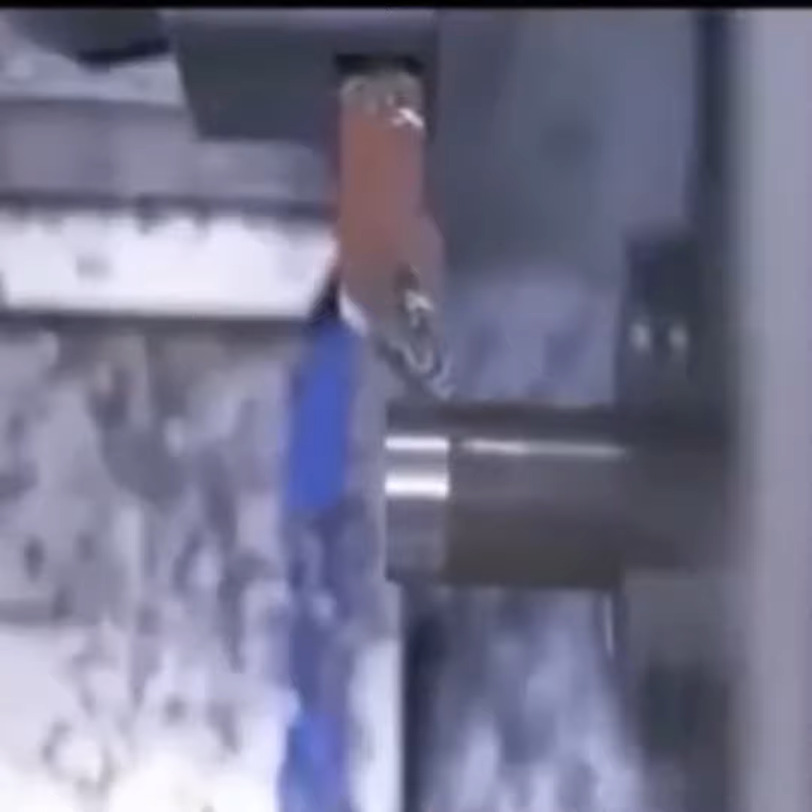A slightly more interesting lathe part, starting out simple with a threaded hole. Then I turned down the major diameter and the smaller end to finish dimensions, and scribed where the tapered section needs to end. Then I set the compound to 15 degrees and whittled away the material up to the scribe line. Going by eye is accurate enough since I added enough clearance on other parts.

And it seems to work, so I smoothed it out a bit, cut it off, and went to the disc sander for the flat. That's necessary to properly start the hole for the pin that gets hammered in place and will prevent the cap from spinning in the hole.

These are done, so next are their matching parts, which are also the machine base sides and the most complex parts to machine. That's because after machining the first side, I needed to take it back to the bench and glue on this additional part. Well, in terms of complexity, that was mostly the programming. There are just lots of operations on this part.

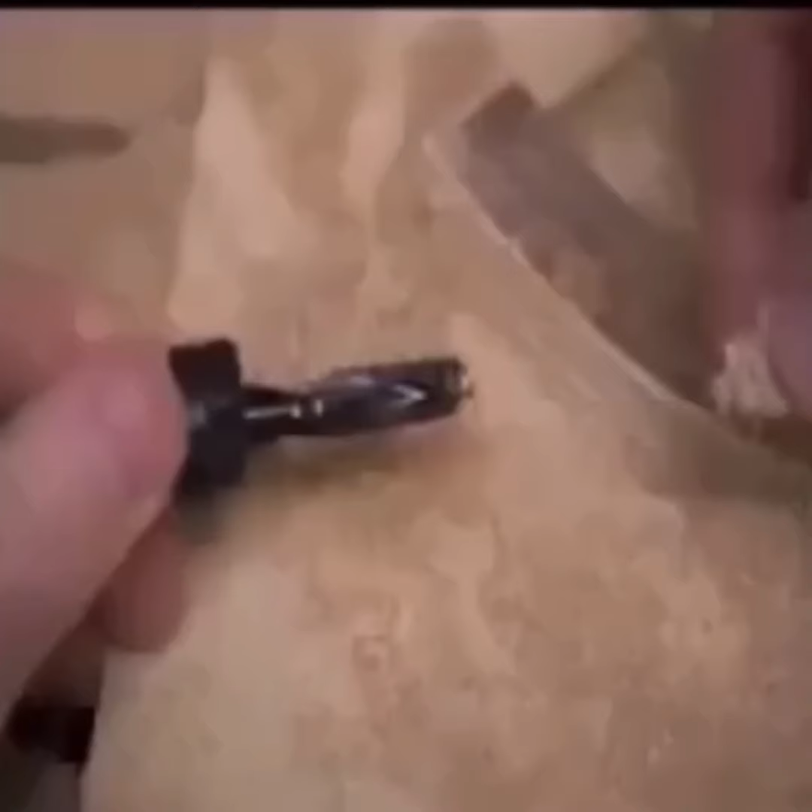That was the roughing cycle, where this roughing bit made a super nice job of creating tiny shavings that basically never clog it up. Alright, the machining is done, and if everything went well, this should now not fit in the slot. And it doesn't. I intentionally made this too small at first, so I could now sneak up on a good fit. And a little problem, because I didn't surface at the end, there's a lot of fuzz going on, so I ran a chamfer bit along these edges to clean that up.

And that is pretty nice. And there's the second one. Let's test if that clamping feature actually works. So now it's loose. I give it a little spin. And it does. Oh yeah, that's tight. I have not tested this before. If that wouldn't have worked, I would have been kind of screwed, but I also couldn't think of a way why this shouldn't have worked. But I'm still glad it does. Oh yeah.

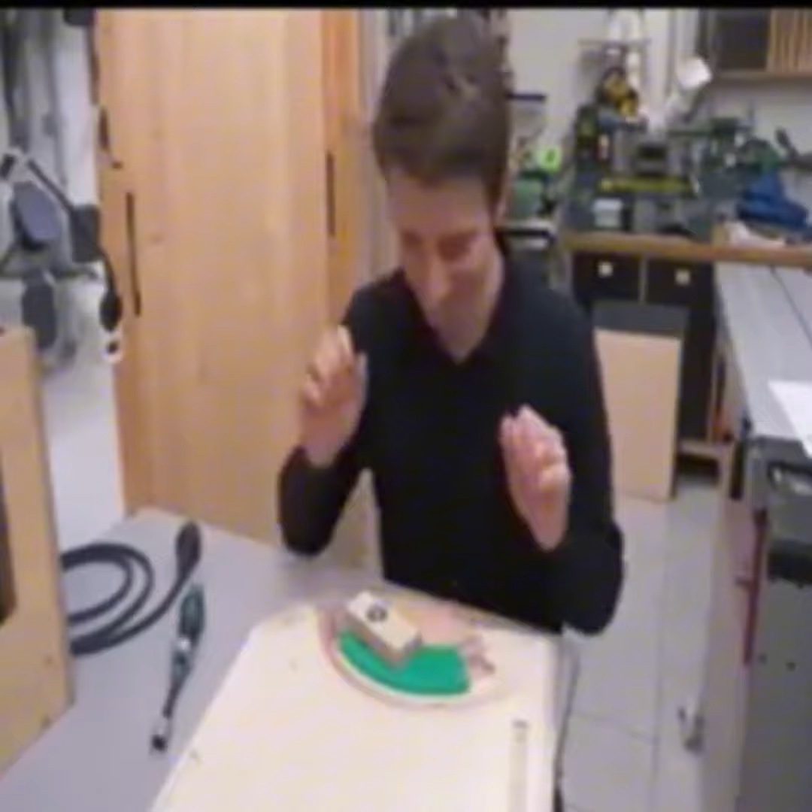That's great. You've probably also spotted these integrated gear teeth, which in combination with a small gear allow me to precisely adjust the angle with a lever. And in addition to the gears, I also turned some gear mounts, very similar to the pulley support, with a simple reamed hole, 3 threaded holes in the face, and 1 more for the set screw.

But to try all this out with the carriage, I first need to assemble the rest of the base. And that is the bottom plate and 2 support ribs. They again got nuts inserted and 1 threaded insert where I tried the drill press. Nice. And then again, it goes together like a simple puzzle. The 2 ribs go into the bottom plate first, providing alignment and square reference for the sides, which can then be clamped and screwed together. And there's your 5-part 3D puzzle complete.

Only thing left now is mounting the trunnions to the carriage with the gears already in place, the 2 bushing blocks inside, and temporarily securing the taper cap. Alright, and now for the first time I can try to fit the carriage in the base, which I have to do like this. Oh, and it fits. Nice. It's also very smooth.

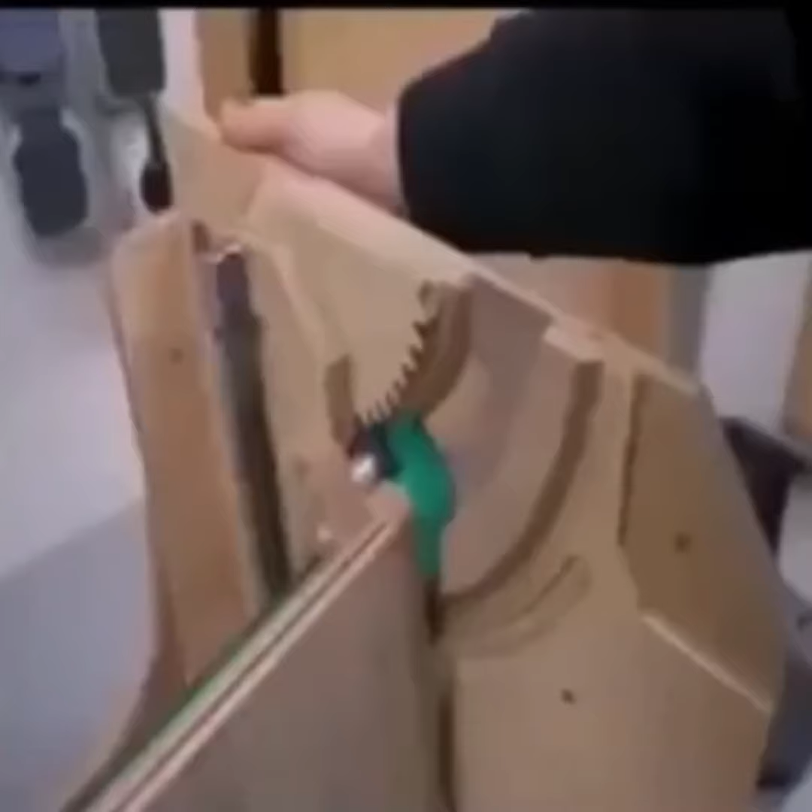There's also a small air gap here and here, so the carriage doesn't rub on these surfaces and only glides on the plastic. The gears are still free to move, that's good. And the whole carriage by design has about 1 mm side-to-side play for clearance, and when I lock it at some angle, it will always get pulled towards this side, removing the play, while this trunnion then just wedges itself secure. So next, I can get the gears functional.

And that's done with a shaft going all the way through to the other side, tightening the set screws to it, and removing the subtle gear backlash with the bushing blocks. The handle is similar to before, a clamping ring that I cut threads into, and a 3D print, but this time it's more of a lever type handle because you do less than a full rotation with it.

And there it works. Nice. I wasn't sure, but this feels like a good size for my hand. And with the gears, I can be super precise with the adjustments. That's nice, but how to lock the angle now?

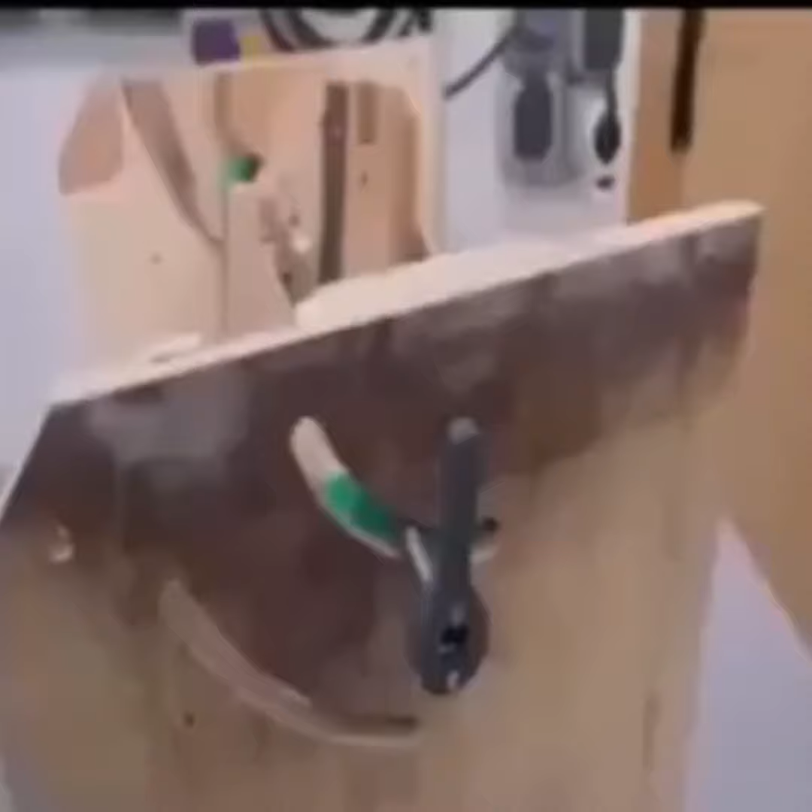Well, you've maybe seen that this shaft is actually a tube where I can now stick a threaded rod all the way through. The end will find the threads of the tapered cap. You can't see, but hear it. When I'm turning left, there the last thread skipped, and now I can thread it in. Now I just had to bring the parts to the right length, so all this can work.

I also reduced the diameter where the set screws mangle up the surface, so the tiny burr doesn't protrude past the main diameter. With 2 nuts, I could tighten the rod into the tapered cap, then the handle with a washer, another washer, and the knob. So now I can set an angle, give this a few turns, and it's locked on both sides, all done from here. That's what I think is intuitive and easy to use.

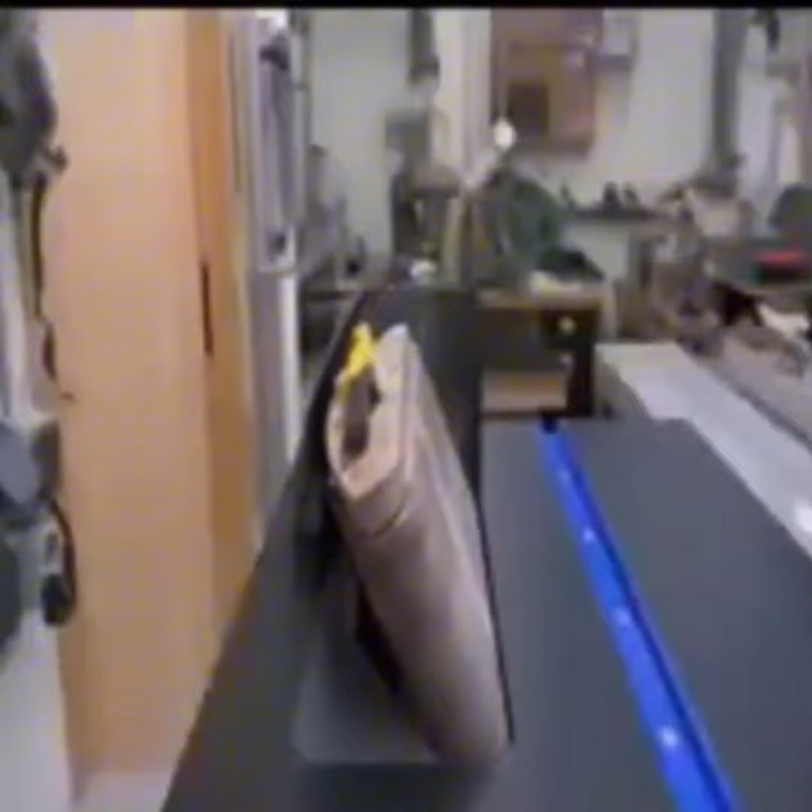Later in the build, I made this even better, because with the weight of all components, setting an angle was getting pretty hard. So I installed 2 gas springs that made a huge improvement. Much better. Of course, we also can't forget about an angle gauge and a pointer that mounts to the trunnion with a little stud.

The base as open box with the 2 ribs right now is pretty strong already, but obviously not enough. So to act on that, I glued together a solid hardwood beam as a structural member, which I then milled square, cut to width, and set up the bevel cuts. This may look a bit sketchy, and I wasn't 100% comfortable with the offcut sliding down the blade, so my dad hit the emergency stop as soon as the cut was done.

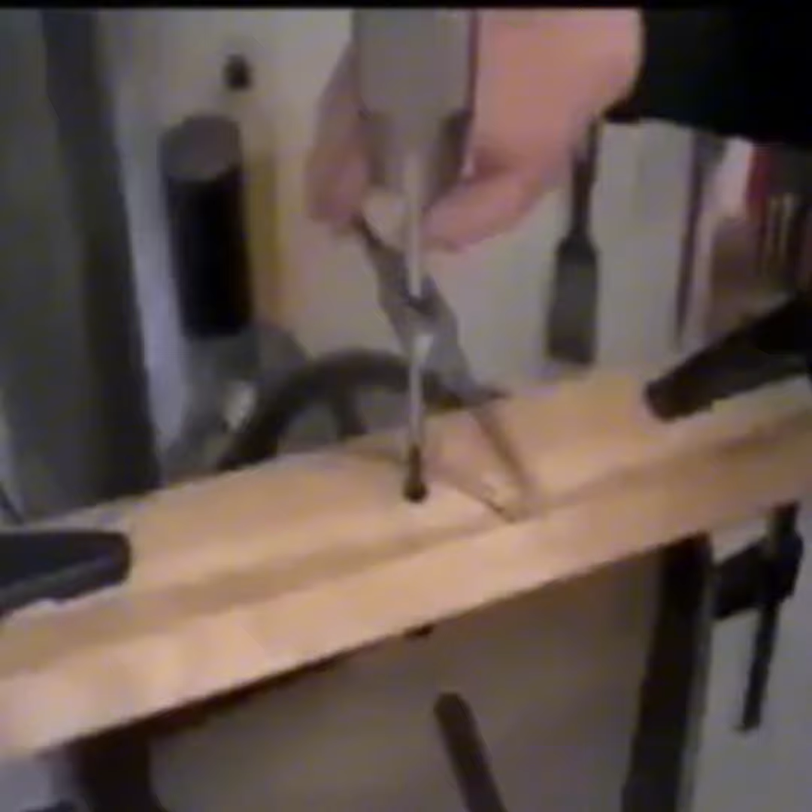Then only cutting it to length, which I screwed up and had to go through all this to give it another try. That's more like it. The piece also got some holes for mounting the table, and with some setup work for the counterbores, and a counterbored hole in the middle for the end stop bolt. Yeah, don't ask. I cut a few threads with a tap and forced the bolt through the rest, making it very tight. Now let's mount it.

I transferred the whole location, but will drill the pilot hole with a slight offset so the screw will really hold it in place. There you can see the offset. With that in place, I can install the 90-degree end stop and the 45-degree end stop, the bolt in the front beam, with both of them now being metal-on-metal contacts.

And there I've got a big structural piece with integrated end stop, and it will also hold the table, which is next. And as you might guess, it also has features and won't just be a simple board. It's made from multiple pieces, and depending on which sanding drum or belt is used, has different table inserts. First of all, the sub-table that holds everything together.

Another CNC routed part, and after the first side is done, I check the groove for the C-channel rail, which needs some adjustment. Difficult to see on camera, but it's a better fit now. Then with the second side done, I can align the C-channel flush, mark the other end, cut it off, and sand it to the line. Would be a perfect job for an edge sander, you know?

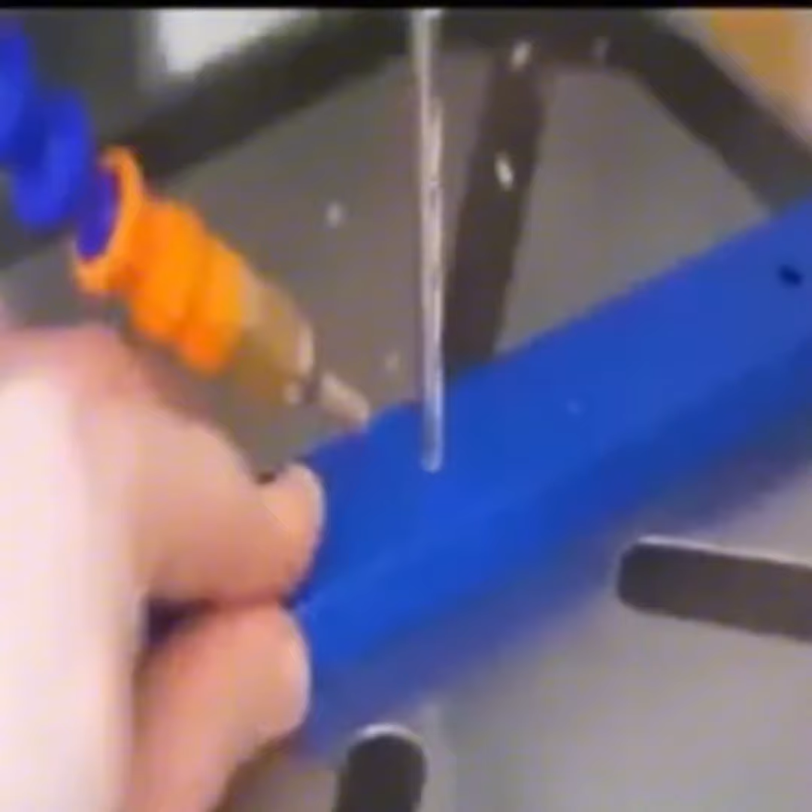I also drilled 2 more mounting holes because only 3 seemed not enough. The material below the C-channel got quite thin, so it got a reinforcement piece that also gives the C-channel screws a lot of meat to bite into. The actual table surface plates are made from the same HPL sheet like the slider or gears. That killed yet another bit. God damn it, I was too optimistic again. Let's better go on with some manual work like reaming 2 holes and chamfer the edges.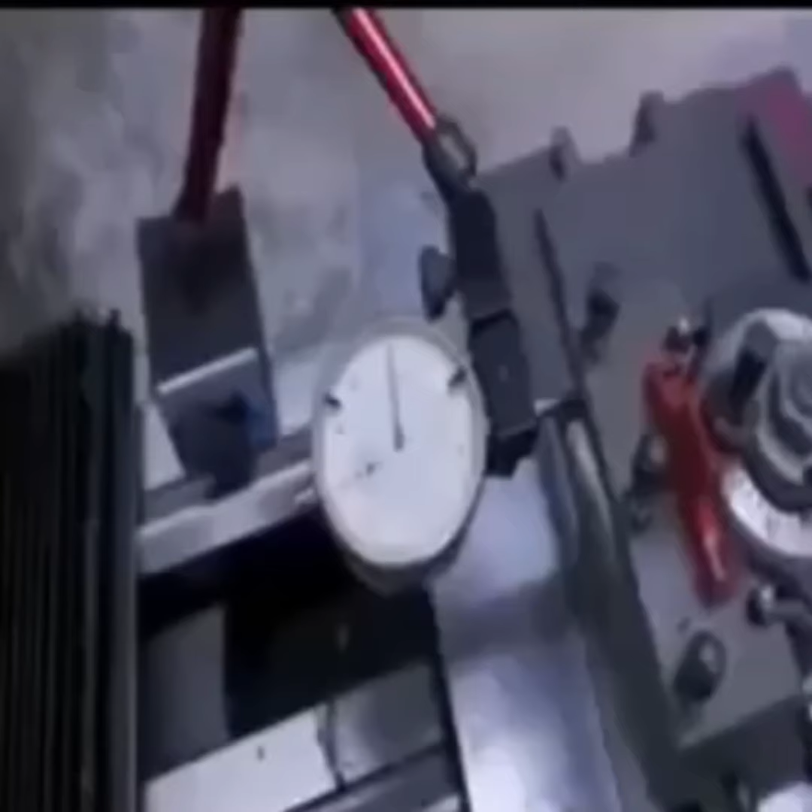Next, I needed some steel brackets, but the right width was out of stock, so I cut a wider piece in half. I really don't want to file these to final width, so I have an idea. The pieces are small enough to put them in a tool holder. I just made sure the tool post is trammed in square, placed 2 spacers under the part to raise it to the center, clamped it down, and just went for it. I mean, the lathe, theoretically, is a mill. After the first pass, I also added power feed. The results speak for themselves.

Not bad. The longer piece I could do in 2 setups, and I could also take much deeper cuts. 8mm depth, no problem. With the same setup, I could then also cut the parts to length. Then just marking and drilling the holes, then rounding the corners, and they are done.

They now all fit into pockets on the underside of the table and will later hold the various insert plates of the table. Some of them can also swivel, but it seems like I forgot to cut the pocket for this one here. But that's no problem. Thanks to the hole grid, I can just remount the part and let the pocket magically appear.

The last parts missing are the insert plates, but they're just some more CNC parts, so let's skip that and go on with the assembly. Like before, there are a bunch of places for nuts and bushings. Then I screw on the support beam and drill the holes for mounting the rail. M5 threads right into the wood. If you wonder if that's strong enough, well, it stalls my little drill in first gear, so yes.

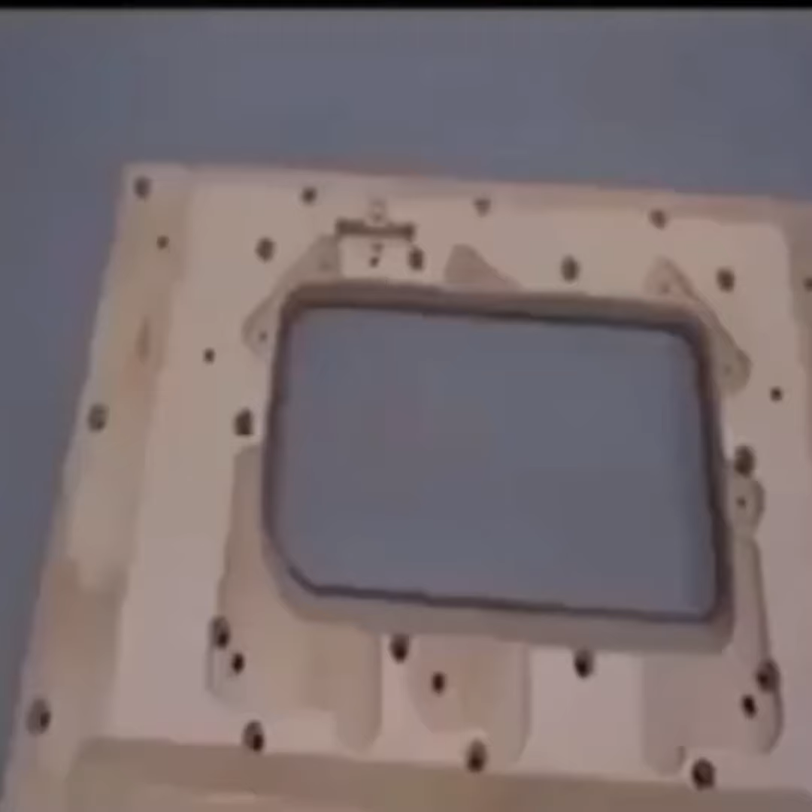Now the top plates. I didn't want any screws through the top to have this nice and clean look, so they're gonna be screwed on from below. There I have all these holes for short M6 bolts, and I'll cut the matching threads right into the table plate with a bottoming tap. Nice and clean, without any screw heads or holes, except for these 2, but you'll see later what they can do. Next are the steel brackets.

The ones that can swivel have a bushing, a brass washer, and a spring washer, so they are always tensioned. Nice and tight movement without play. However, a little bit of flex, and that's what these slots are for. I marked and drilled a hole in position for another screw that supports the end of the bracket and removes all the flex. Only problem, these screw heads collide with the slat at 45 degrees, so I have to drill some clearance holes.

Except for the inserts, that's the table complete, and I can mount it with 5 bolts, 3 in the front beam and 2 in the back, and some blocks that are screwed and later glued on.

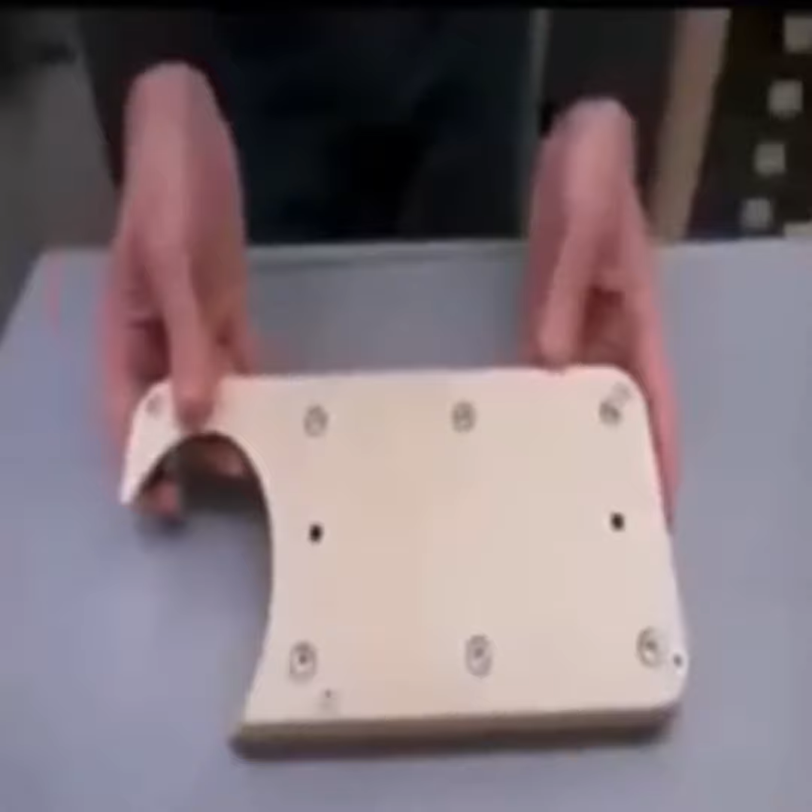With this tabletop, I could now also finish all the inserts and make them a perfect fit. And here's how they work. First, the insert plate gets screwed to a sub-insert plate to make it stronger, and it also houses 4 leveling screws. 3 different kinds of insert plates. This one is for the biggest drum, this one for all the other sizes, together with smaller inserts for each size, and this one for the belt.

For the big drum insert, I need to flip out this metal bracket and this one, so I have 4 positions for the leveling screws. And the weird shape, of course, is for clearance when the spindle is tilted. Then for this insert, I don't need this bracket, but the other one in the corner. And the individual small inserts sit on some more leveling screws just in there.

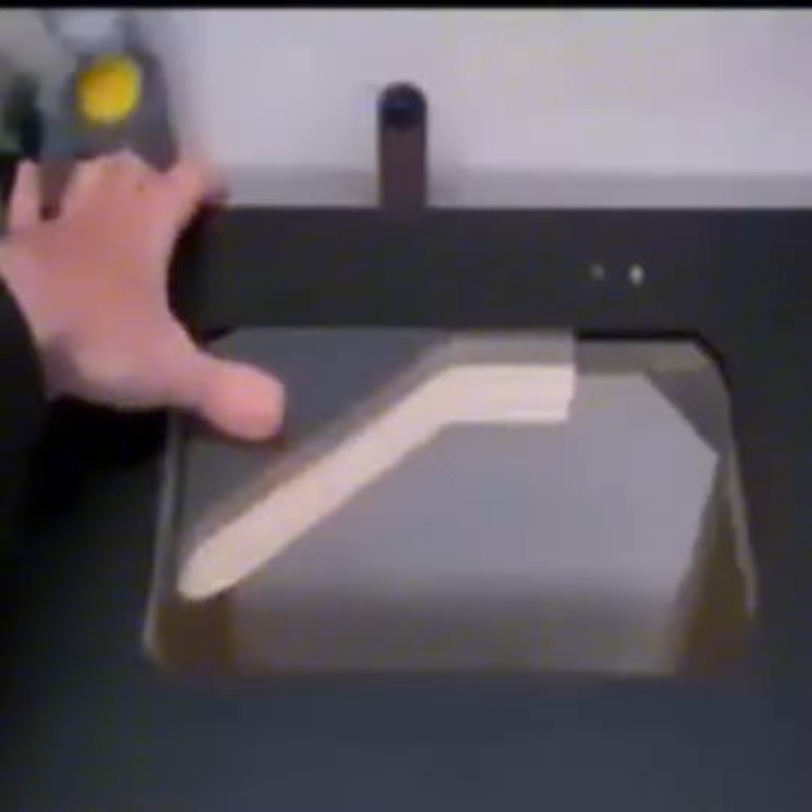Lastly, the belt insert doesn't need any of the flipping brackets and just sits there in the corner. But to prevent it from sliding around, it gets a pin that fits a hole in the long bracket. Oh, perfect. Now I've got all this done, but still can't sand. So it's finally time to make the belt tension assembly and the sanding spindles.

The tensioner has 3 rollers. 2 of them are stationary, which already give me 2 different diameters to sand against. The third one is for belt tensioning, and all controls are tool-free and easy to reach on top. Quite a complex assembly, and the base is again some CNC cut parts. But I think we are all tired of that, so let's just grab them right from the screen. Ugh, not the belt. Yeah, that one. Very convenient, and I also don't think you need to see me making simple bushings.

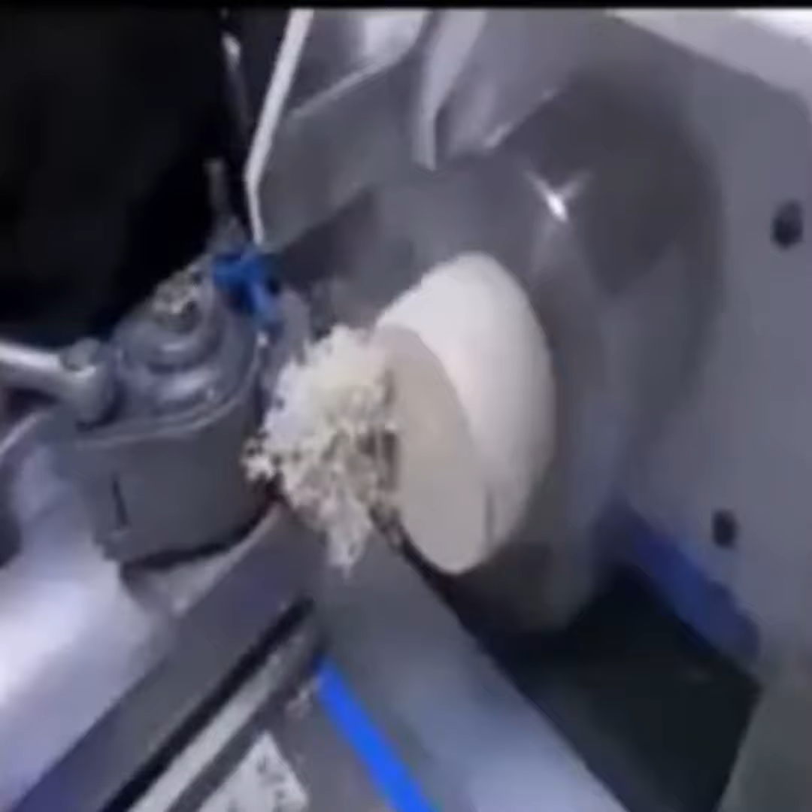Much more interesting is the main drum, for which I have an offcut of a huge plastic sheet. It's gonna be made out of 3 pieces, and since it's plastic, that means a lot of lathe fun. Machining this is just easy. So first I turn the middle piece to length, to a roughly oversized diameter, and then drill and bore a precise hole for the shaft. Well, it sounds kinda wrong, but a slip fit is what I'm looking for.

The outer pieces are a bit thinner, so more turning fun. Facing is easy, drilling is easy, and boring a precise fit is also easy. But I still made sure to remove the same amount from both sides, so internal material stress is still evenly distributed. And then I also shaped the ends to dimension.

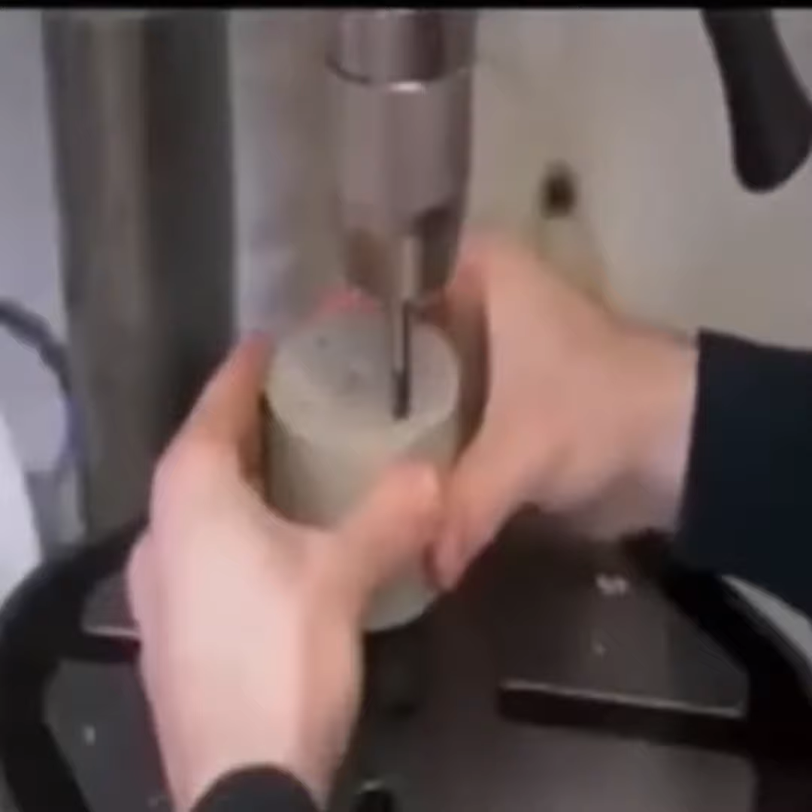Next I made a template for the whole pattern that once again just fits over the pieces to transfer the positions with a drill. The middle piece then got the M8 threads, and because it's plastic and nothing is sharp, I can do that like this. Never attempt that with aluminum or steel. The outer parts got M8 through holes with counterbores. And another template for the pinholes that match with the drive block.

And now I can assemble the drum on the shaft itself and screw it together. M8 is definitely overkill, but I already had the bolts, so I used them. Now I've put another shaft on the lathe to finish the drum on. I'll use 1 pin resting against the jaw to transfer power, and with the help of a few bell washers, the tailstock will support the shaft center and press the drum against the chuck.

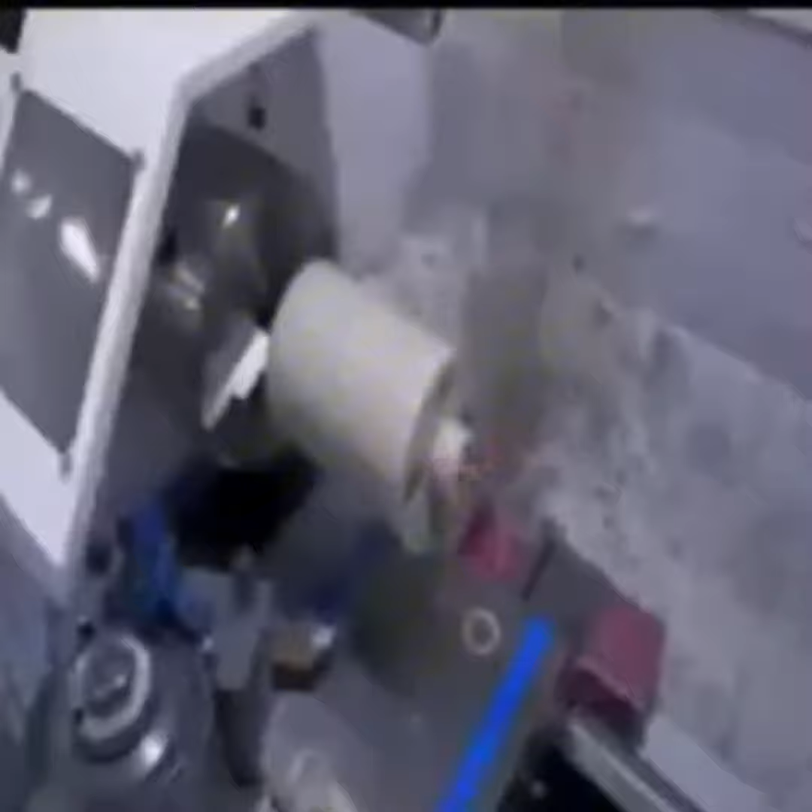Then I could finish turn the biggest outer diameter and turn the channel in between. Here the chips can be really annoying, but at least removing them is quick. Now just touching up this side and it's done. Now I remove the outer piece again to add the grippy material.

A simple solution would have been heat shrink tubing, but it being relatively thin, I didn't have too much trust in it. So I printed these thicker rings from flexible material that get stretched over the cylinder, which then gets bolted back together, and I can turn the flexible rings to final diameter.

Really funny shavings. Could also be my back hair.

Wait, what? My target was 75.6. Close enough. It's not as grippy as the one on this sander, but since it's larger and also used as a backing drum to sand against, this should be just fine. The other rollers are made from 30mm aluminum tubing with 3mm wall thickness. They both get bearings, so back to the lathe.

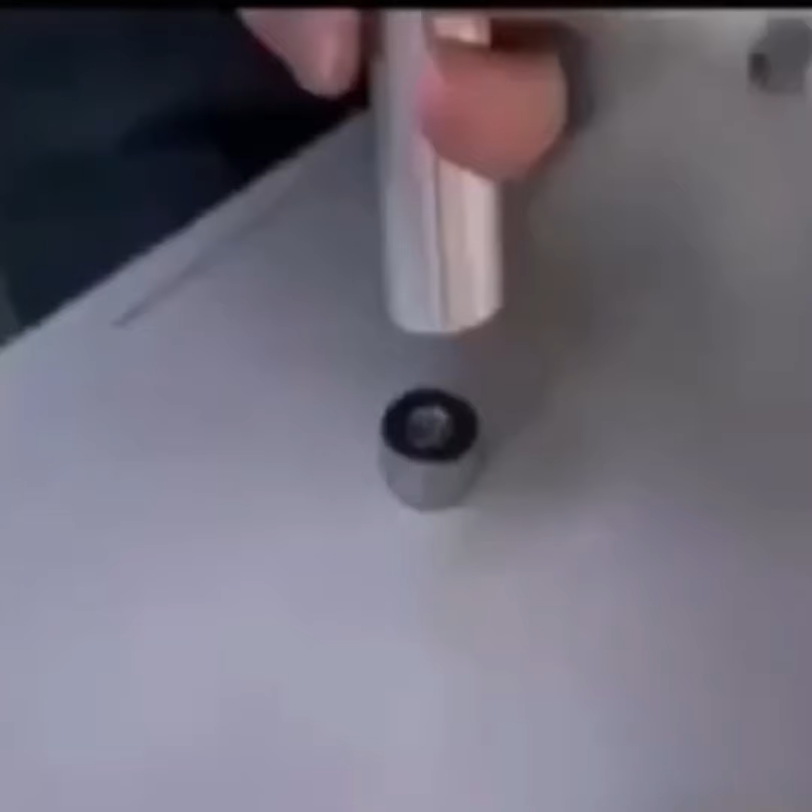It should have been straightforward, but after checking them for runout, I decided to take a light pass from both sides to fix that. And the error I get from flipping in the chuck is less than the runout before. Then turning the bore, this time to an actual press fit with the bearings. Now the bearings. The part on top makes sure I only hit the outer race, so hammering is fine.

With the bearings in place, I took the tension roller back to the lathe to turn a little bit of a crown to it, which should help with belt tracking. He's gonna regret that. The matching shafts are simple, with one threaded end.

That's the rollers done, so up next is the belt tensioning mechanism, which involves quite a few parts. But most of them are simple and I won't show them in detail. We have metal plates with holes, aluminum plates and angles with holes, a shaft with a cross hole, and one that's a bit more complicated. Turning the ends is simple. But the difficult part here now is to cut the flat along the whole length.

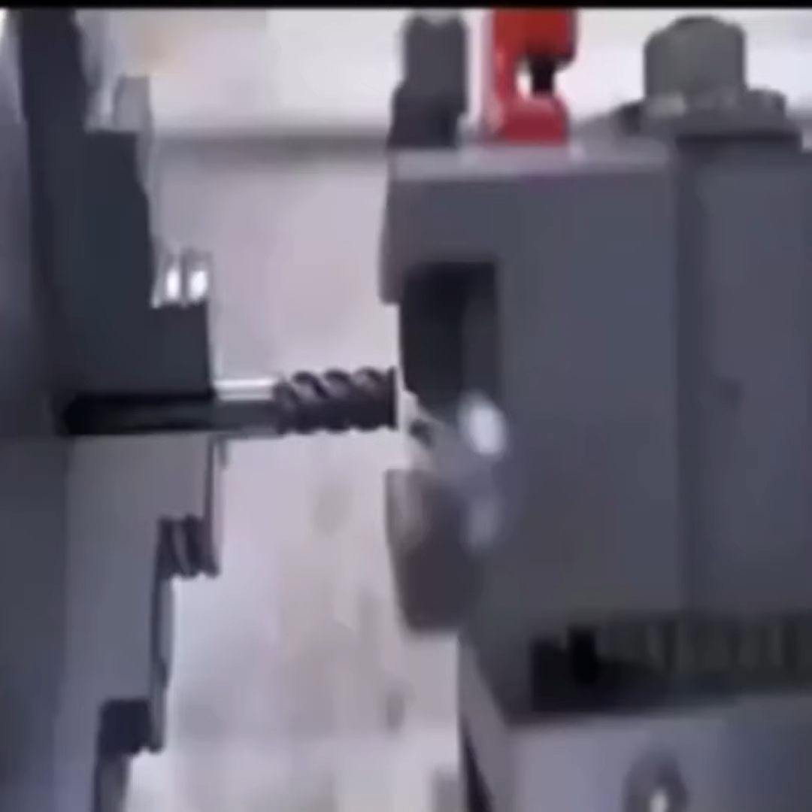I again just tried to fit this in a tool holder, and as luck would have it, this is such a perfect fit that the screws are slightly off center, and when I clamp it, it will clamp it down and back. Then I slid the tool post forward, set the height, and trammed it in square. You can see about as much as me, but it worked without any problems.

My target dimension at the flat was 9mm. Looks pretty good. The surface finish is also nice, and the clamping marks don't matter. Then just the threaded holes, and it's done. So, up to the real challenging part. This cam disc with an eccentric and a tangential hole. Facing, turning, and parting to size is the easy part.

The tricky part now is to get this hole 2mm from the center. I could just mark it and go to the drill press, but I wanted it a little more accurate. I only have a 3-jaw chuck at the lathe, which doesn't allow me to put it off center, but when I shim 2 of the jaws with a 3mm spacer, like so, this will put the center axis of the chuck exactly 2mm off center from my part.

Perfect. And the next tricky part is to get a cross hole for the clamping screw in there. Eyeballing the position is good enough. So back in the tool holder, I line it up with the center, lock everything down,